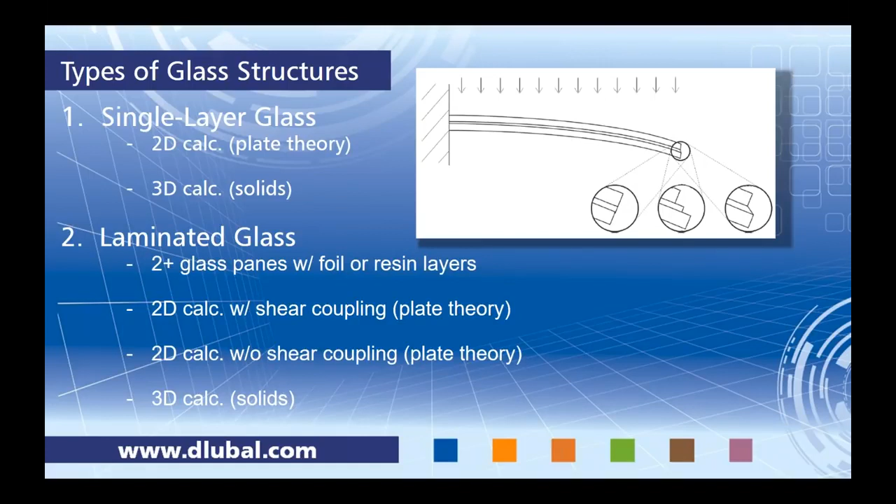The second type of glass is laminated. With laminated, we have two or more glass panes with a foil or resin layer in between. For this option, we also have 2D and 3D calculations available. The first 2D calculation considers shear coupling according to plate theory, which we consider a rigid shear coupling, indicated by this picture here, showing the cross-section of the layers and the rigid coupling at the ends. The 2D calculation without shear coupling is still according to plate theory, but there is no relationship in terms of the shear transfer between each of the individual layers, indicated by this second picture here. The third option is with solids, which is nice because we account for the shear stiffness between those intermediate layers to come up with the exact shear transfer between the shear couplings.

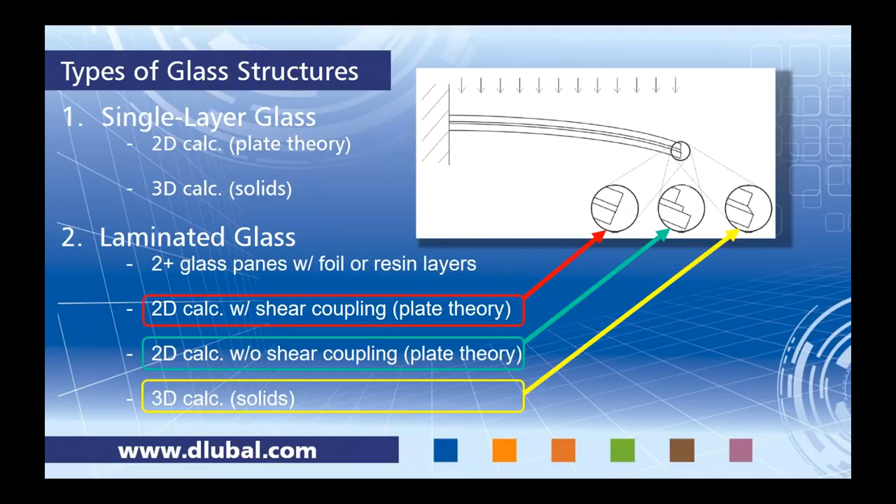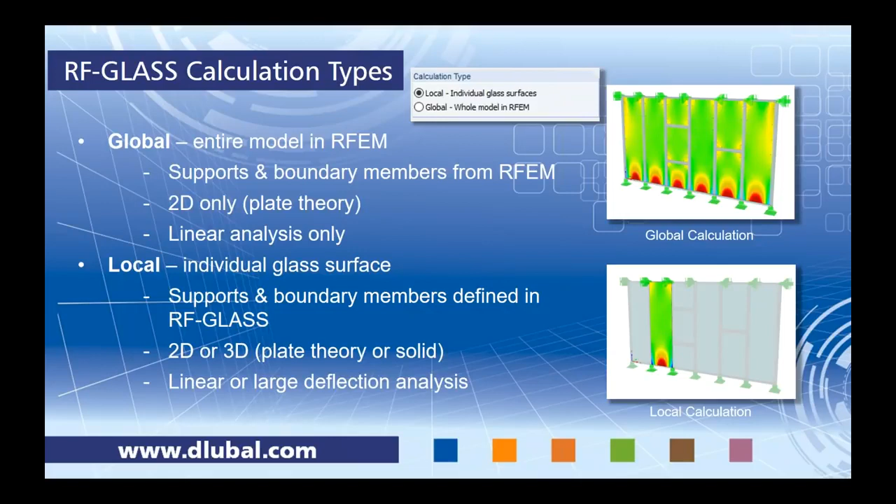I did want to touch upon the NCSEA putting together a new design guide. This design guide was just released this year, and it's called the Engineering Structural Glass Design Guide. To phrase it exactly how they phrase it within the design guide itself, it's to collate relevant design references, requirements, and analysis methods into a single source for easy reference.

I believe that when it comes to glass design within the US, it's a little bit difficult because unless you're an expert, there's really no clear-cut design path to take with glass. So what the NCSEA took upon themselves is to compile this document—it's not very long—to compile maybe some theoretical literature along with what we do know within the US, maybe according to the ASTM design guides, as well as Eurocode references, so that engineers without a lot of experience can relate to this design reference.

So I did want to touch on Chapter 6 with finite element analysis. This design guide goes on to state that, of course, we can always run hand calculations for glass design, but at some point these models may get a little too complex, so that's when we should turn to a finite element analysis software.

They also refer to global and local, but this is a little bit different terminology than what I just discussed with our global versus local. With the global model within this design guide, they state that the glass elements can be simplified into 1D member elements. This might be most beneficial just to gather internal forces, the load path, things like reactions, and to run a simple linear static analysis. By all means, this is possible within RFEM as well.

Okay, so we are finally ready to jump into our first example. It's quite common with glass design that we want to integrate it with our own custom extruded sections. These aren't sections that you would find within the AISC or the ADM, but rather some type of unique cross-section. Within RFEM, you most likely won't have access to quickly define this cross-section without having to manually calculate all the cross-section properties. So we've created a program called SHAPE-THIN.

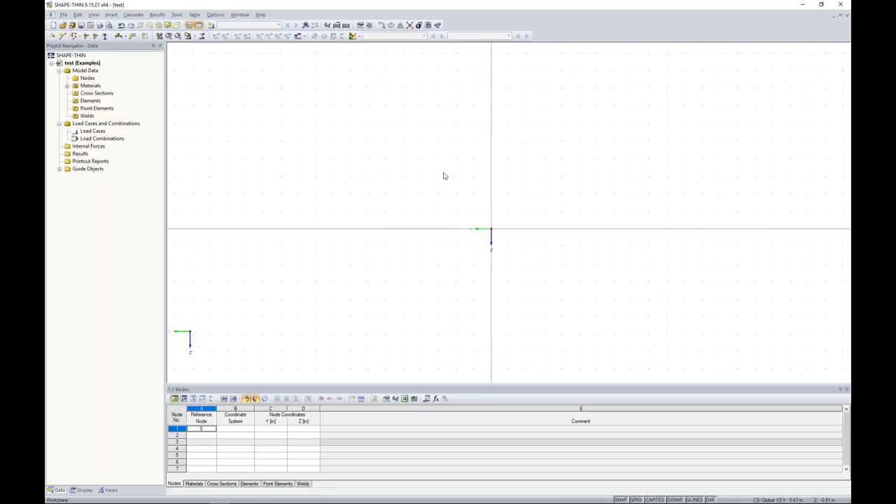For those of you who are familiar with RFEM, the interface looks almost identical, so that's nice that there's that familiarity. You can import an AutoCAD file, but today I'm just going to draw my cross-section and have the program calculate the cross-section properties that I can later bring into RFEM.

So what we'll start off with is a new polyline. With this polyline, I need to define the thickness of my cross section. We'll set this to something fairly thin at 0.15 inches.

As I draw this polyline, I can also take into consideration a bend radius. You can set that bend radius here. We'll choose 0.04. The material must also be specified.

Steel A992 is probably default when you first launch the program, and we can enter into our material database and use our filters over on the left. Instead of steel, maybe we drop down to aluminum and take a look at ASTM, further filtering to the ADM 2015. Now you can see the long list of all the aluminum material, so most likely you'll find what you need. Today we'll take a look at the T6510 for extrusions, and here are all of my material properties.

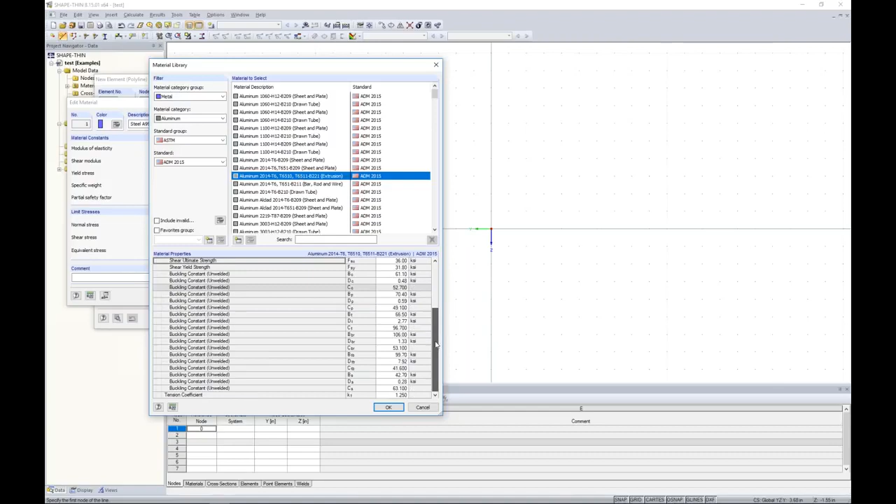I can click OK through these dialog boxes. Now I'm taking a look at my graphical interface here, and I can begin drawing my cross section. All I'm doing is snapping to a few various points on my drawing grid, and you'll notice that bend radius is taken into consideration when I turn these corners.

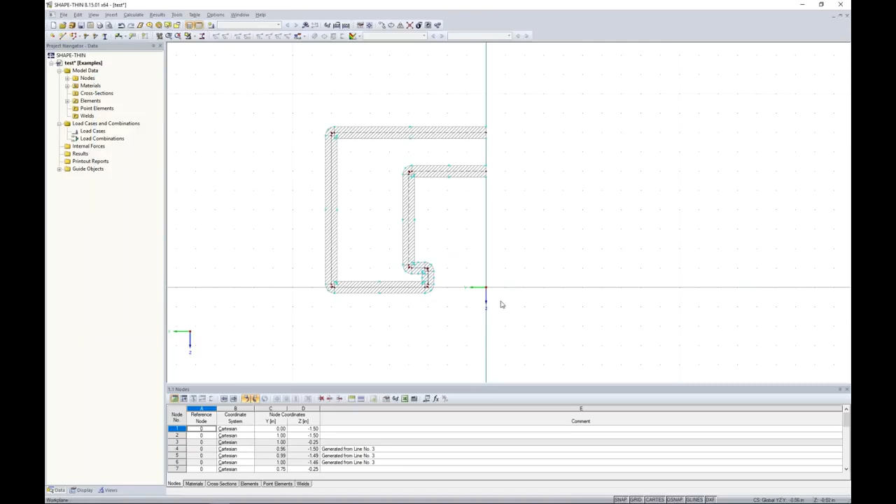Now I'm only going to draw half of the cross section because I can utilize some of these AutoCAD type features that make our lives a little more efficient. I can select the left side of my cross section and use my mirror tool, up here in the tools, where I can create a copy and mirror about the origin. I click OK, and just like that, a fairly simple but custom extruded section is created.

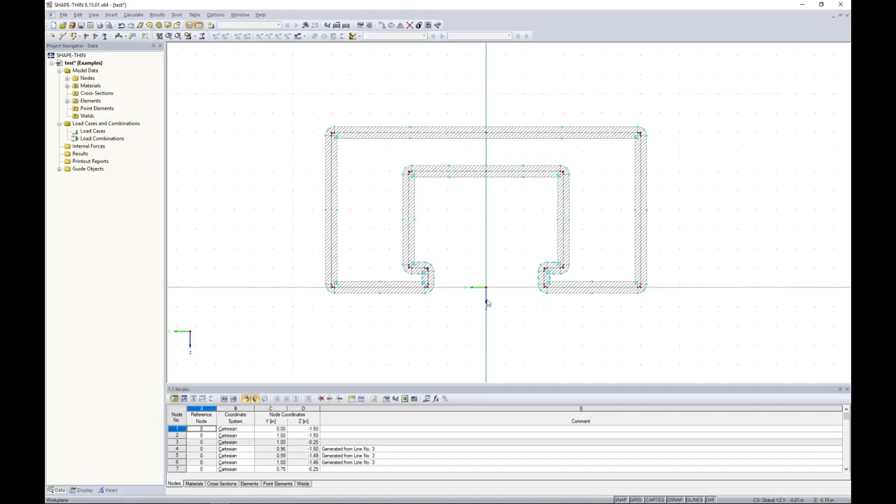So I'm almost ready to run the analysis to get my cross-section properties, but I want to jump to materials. For aluminum, you'll notice that the yield strength is automatically set to 0 here. So if I try and solve this, I'll get an error.

The reason why, if we take a look at the aluminum material, is that there are different yield and ultimate strengths depending on if we're looking at tension, compression, or shear. So the program simply doesn't know what to use when calculating the plastic cross-section properties.

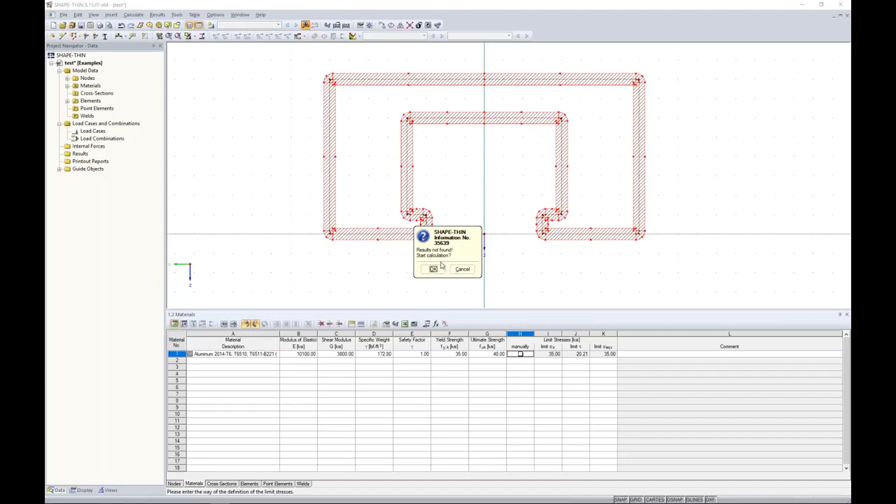So I can realistically set this to whatever, it doesn't matter, 35 and 40. The reason is because I'm going to redefine the material once I get into RFEM. So for now, just as a placeholder, we can now run the calculation with that applicable yield strength set in there, and in just a second you can see it solves pretty quick.

Now available in my results table are all of the cross-section properties for this custom cross-section. So we want to save the results, and you have to save the results with these calculated cross-sections in order to integrate it with RFEM.

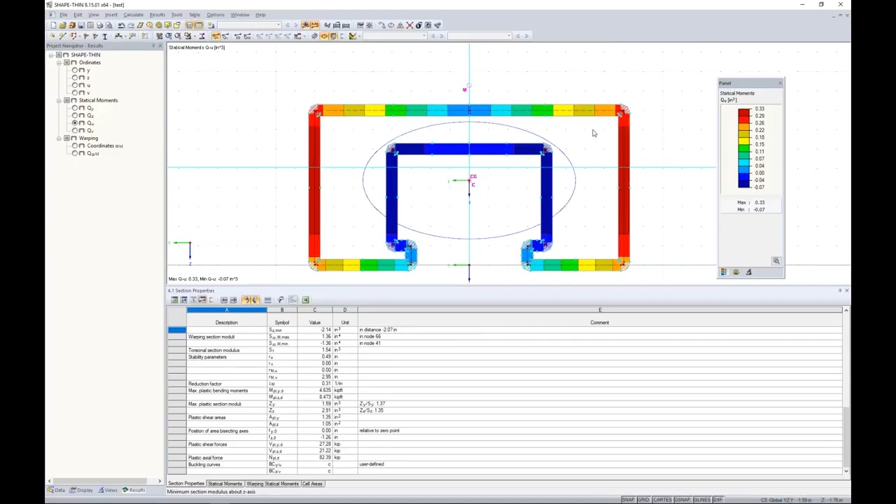So now, changing programs here, we'll go over to the program RFEM. To begin with, I need to create a model name. For this one, we can call it webinar. Now, the type of model is 3D.

So here's my graphical interface that we'll utilize to begin modeling our facade wall today. We also have our tables down here at the bottom to work with. You can import and export directly to and from Microsoft Excel, and we'll certainly be utilizing these quick tools up at the top.

Over on the left is our project navigator, maybe a little bit more unique to our program RFEM. As we begin to model here, all of our input data will be available in these tree-type lists.

The results will also be available here.

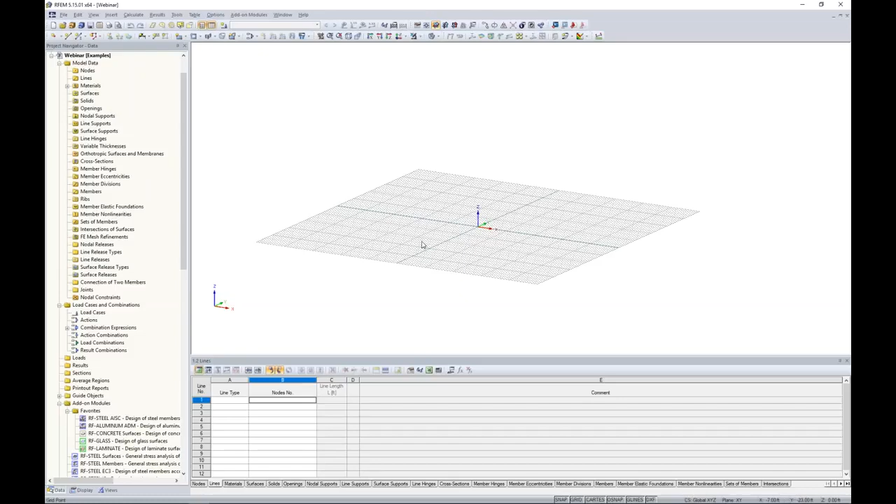So what I'm going to do is change around my drawing grid to begin drawing my facade wall. I want to start off with a new member, so I click on my new member tool. The member type is set to beam, and I'd like to take a look at my cross-section library.

Here are all of my cross sections available. This includes shapes from the AISC, the CSA, the ADM. You also have these parametric thin-walled sections here, but you'll notice that I don't see that custom section I just created. It's not an option to choose from.

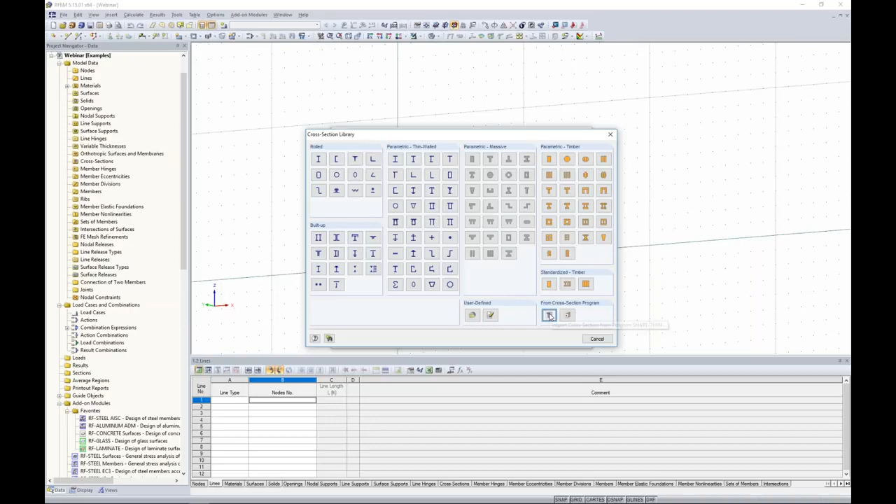So that's why we're choosing this option down here to import the cross section from Shape Thin. Then I simply navigate to where I saved that file, and there's my custom cross section available to me.

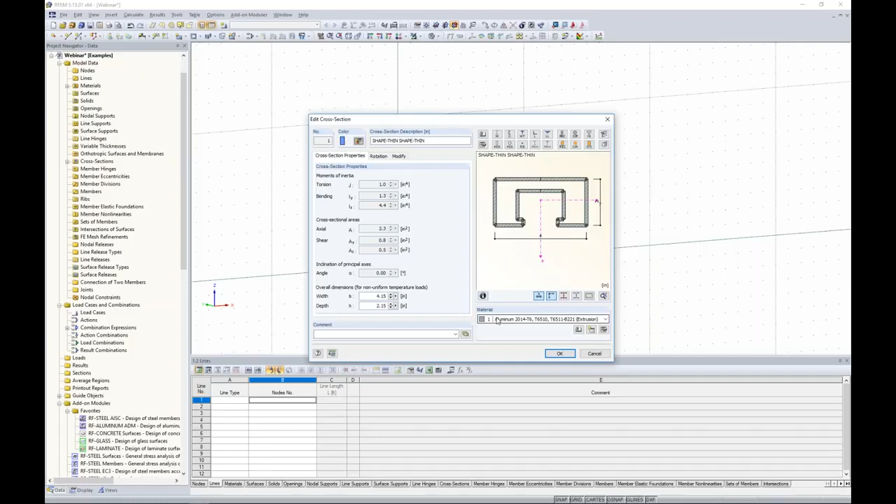Once I load this, I can also modify the material here. Perhaps this was set to steel A992 or whatever default material was in the program, but we can quickly access our material database here.

Again, this looks familiar - this looks exactly like what we saw in Shape Thin. We can filter on the left to the ADM 2015 to choose our T6510 for extrusions, and I click OK.

So just like that, we now have this custom cross section available to us within our main program, RFEM. All I'm doing here is snapping to a couple points to create my boundary members for my first glass panel. Once I'm done with that, I've created these 4 members.

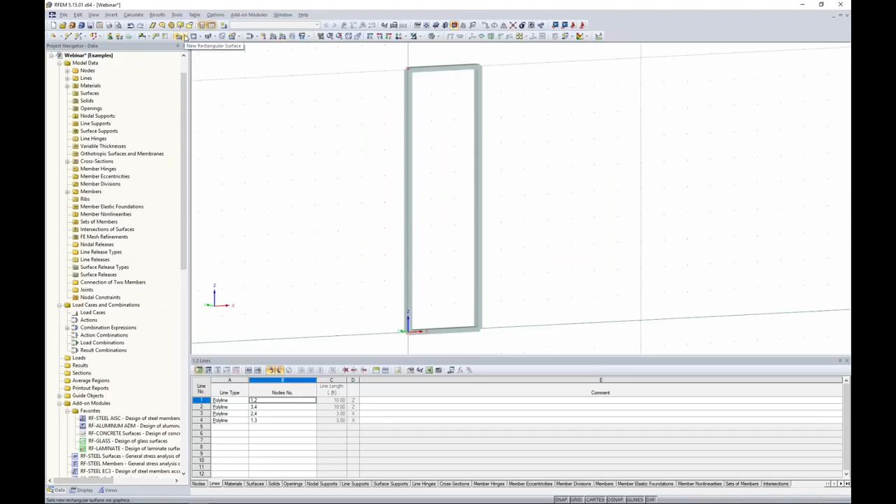I want to draw in my glass panel. We can do this with a new surface element. Up in my quick tools, just like how I drew the beam member, we can draw a surface element. You'll see here we have multiple surface shapes, but for today we're just going to utilize a typical rectangle shape. This is where we choose the stiffness from our drop-down menu, set to glass.

As far as the material and thickness, this doesn't matter - we're going to override this in just a little bit of time with the RF-GLASS add-on module. So aluminum, steel, concrete doesn't matter. Thickness doesn't matter - that's just another placeholder.

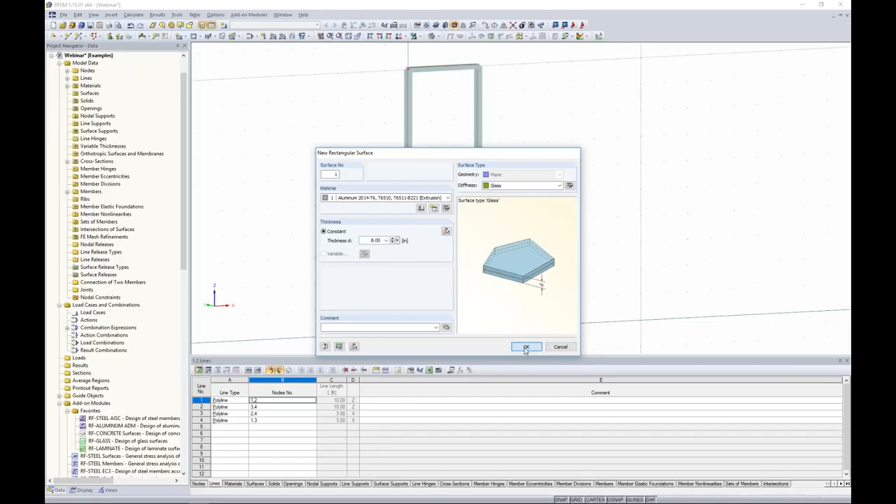So what we can do is just snap from one corner to the other, and then that 2D surface is drawn for us. Let's also say that we would like to release the moment of this glass panel framing into these boundary members - maybe it's not a typical connection type to transfer the moment from this surface element to those boundary members and vice versa. So how do we do this?

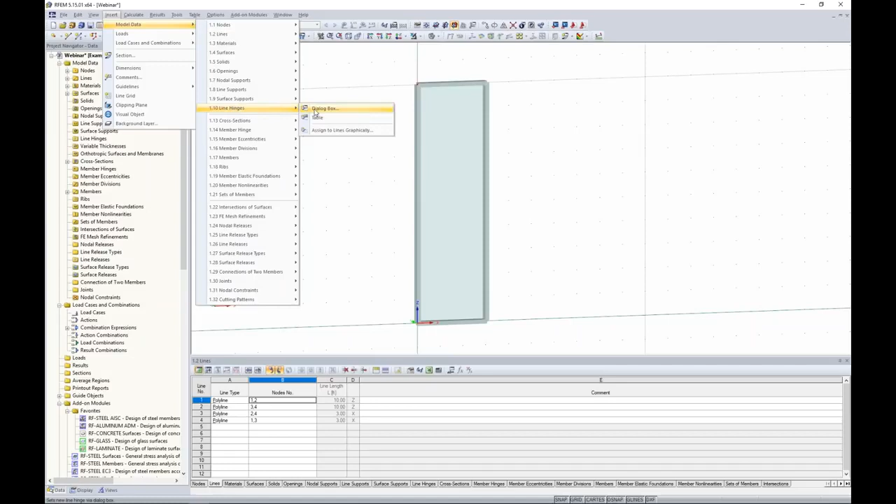Well, under Insert and Model Data, we have the option for what's called line hinges. I can assign to lines graphically, and up pops my dialog box. Right now I don't have a line hinge definition - it just says none. So what I'd like to do is create a new one. Here are my 6 degrees of freedom for my local axes according to my line.

Now, this is not the local axes of my surface, and it's not the local axes of that beam, but it's actually the shared line that they have in common. So what I want to do here is release the moment about the local x-axis of the line, which is along the line length, and I click OK.

So now I can select this surface and then easily click on the 4 line elements on the boundaries, click OK, and now we can see the line hinge shown here with this available symbol.

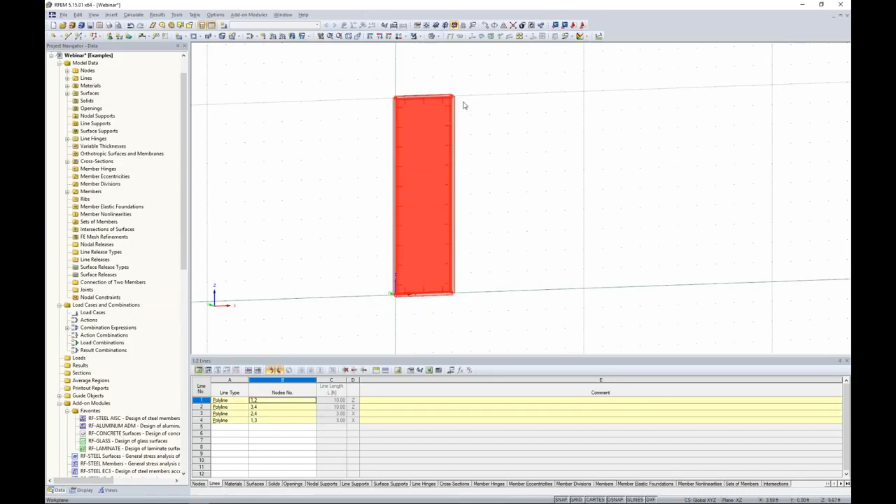I am going to select everything here, just like what I would do in AutoCAD for example, and use my Move Copy tool. I'm going to create 5 copies in the displacement vector of 3 feet in the global X direction. I click OK, and now it copied over the line hinges, the boundary members, and these surfaces.

Well, I've decided that for this 3rd panel and this 5th panel, if I hold down my Control key, highlight them, and I hit Delete on my keyboard, I want to subdivide these into smaller glass panels.

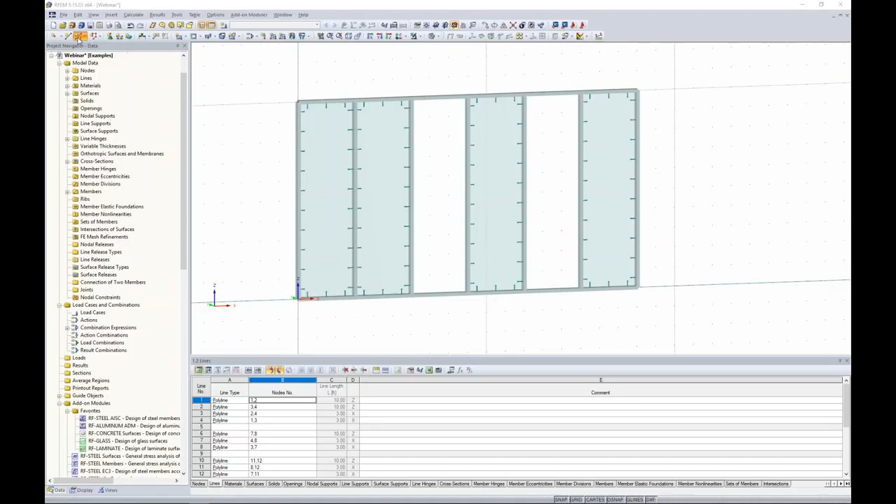For this, I want to draw a new member again. Now my Shape Thin section, along with my material, aluminum, has already been set - I don't need to redefine that. I'm utilizing the same shape and the same material. All I need to do is click OK, and then I can begin modeling here to create some smaller glass panels.

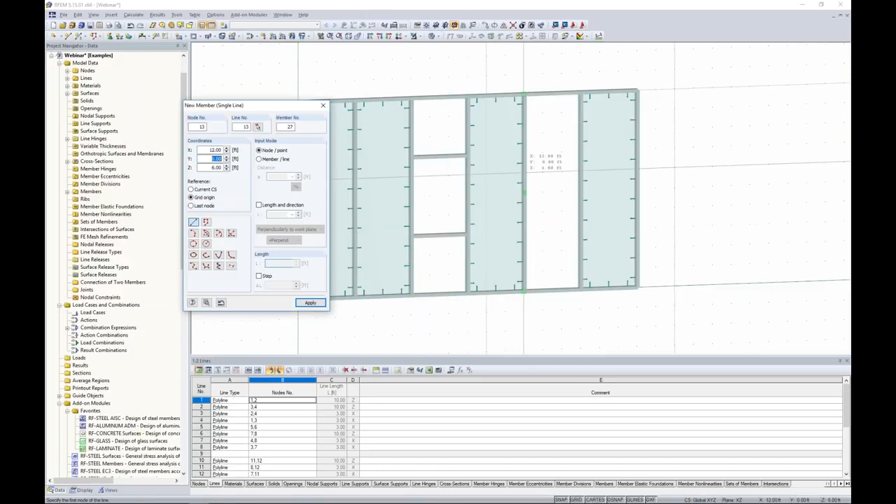We'll do the same over here, but we'll just subdivide this one in half, and right click. Now I'm going to utilize this tool up here to connect all of my lines, and that just creates a node here and separates these members.

Now you'll notice that I obviously lost my glass surfaces, so we want to go back to draw a new rectangular surface and set the stiffness to glass. Remember, the material and thickness don't matter at this point, we're just defining the geometry. So snapping from one corner to the other, I can quickly take into consideration these smaller glass elements.

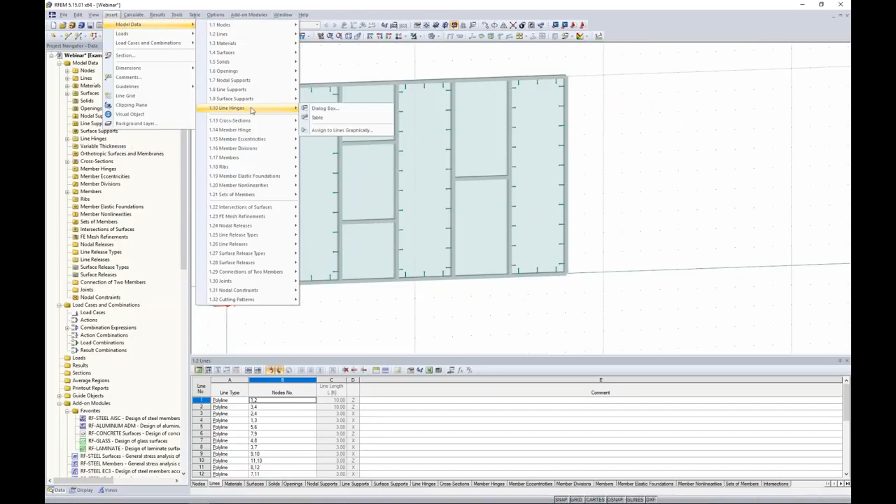Now I've also lost my line hinges, so under Insert, Model Data, Line Hinges, assigned to lines graphically. We've already defined the type, so I don't need to redefine that. All I want to do now is select this glass panel and select the 4 boundary members.

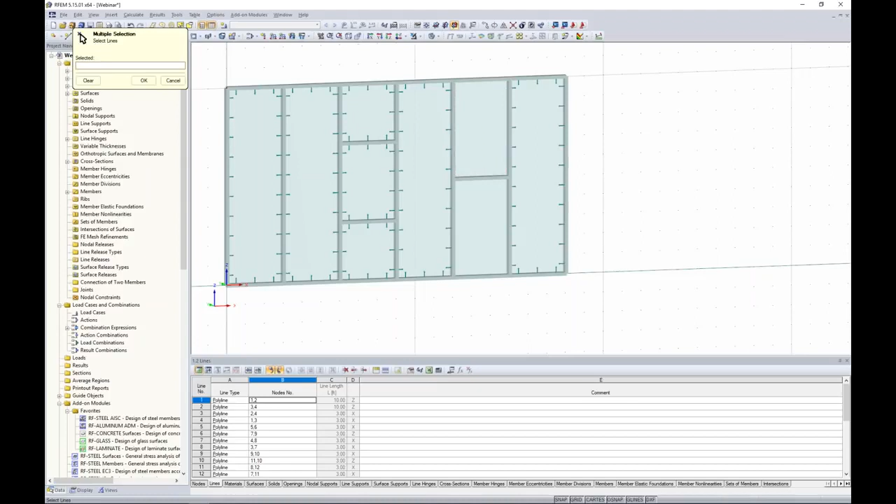And I need to do the same thing for all of these new glass surfaces. You can see the benefit here of utilizing that Move Copy tool so that we don't need to individually apply these line hinges to each surface like we're doing now for these smaller segments. We'll do the same for the 5th panel point location, and finally for our smaller panel here, we are done.

Okay, so the geometry is pretty much accounted for, but there's one thing I'd like to adjust. If we take a look at this member here and I choose visibility by selected objects and zoom in, you'll notice I get a great rendered shape of my cross section. Although it's custom and we might have some different lips and extrusions, you'll always get a nice rendered view so I know exactly where the orientation of my members are.

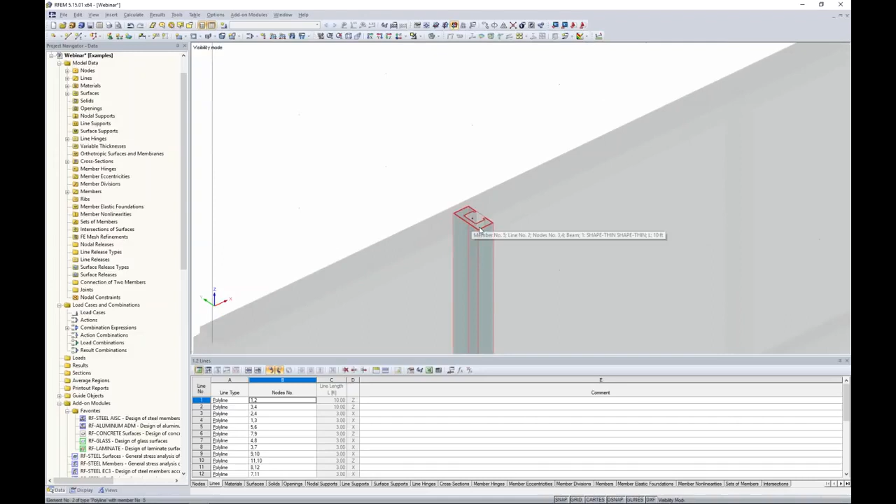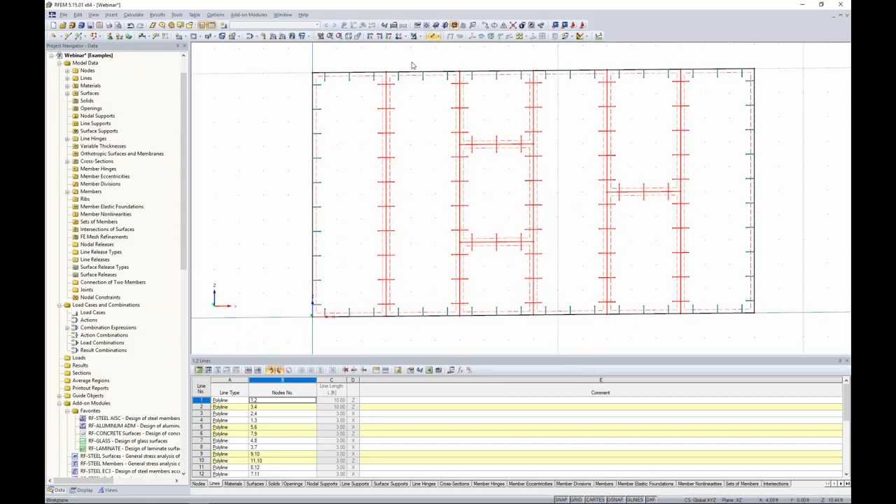For these internal members, I actually want to rotate them 90 degrees, maybe that's just the type of connection for this facade wall. So canceling out this visibility and turning this into wireframe view, I'm going to select all of my internal members here. I didn't select the outside boundary members, I just simply double click on one of the members, and then right away I can adjust the angle to 90 degrees and click OK. Now when I turn back on the rendered view, all of these internal members are now facing towards the global y-axis.

So we would like to support this wall. How we'll do so is with Nodal Supports, again just a simple tool up here, New Nodal Support. Now we have a couple default options, Hinge, which is a typical pin nodal support, and Rigid, which is fully fixed. For the bottom of the wall, let's just utilize a simple pinned application. I click OK, I highlight along the bottom of my wall here, and now that pin support will be applied to every node along the bottom.

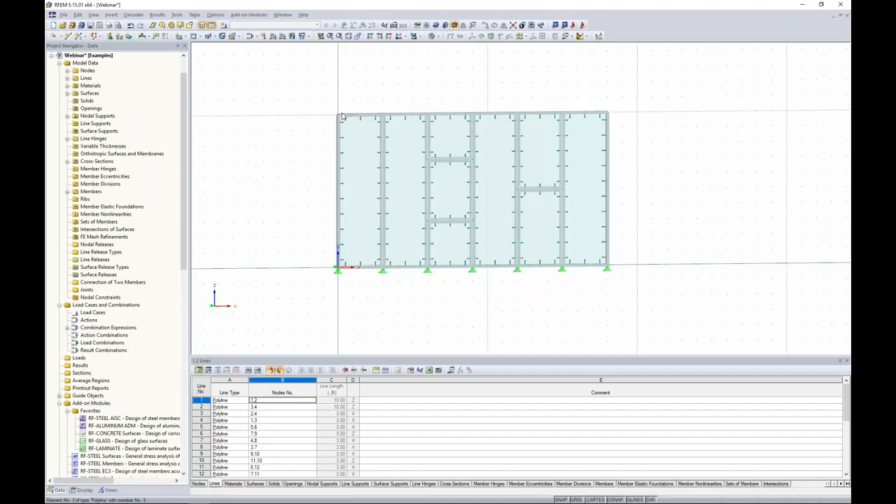As for the top, I also want to apply a nodal support, but this time I don't want to use one of these default options, I'm going to create my own. Here are my 6 degrees of freedom, 3 in translation, 3 in rotation. I'm going to release translation in the Z direction, so I want this wall to have a roller type support in the vertical direction. I click OK, so now I have this user-defined type of support, and I can highlight the top of my wall here.

So realistically, the modeling of the wall itself is complete. We want to move on to applying a couple loads to this wall.

For this, we need to first define our load cases. So another button up here called New Load Case, and up pops my Edit Load Cases and Combinations. The first load case is going to be dead load. Now the action category is important because this tells the program what load factors to apply according to ASCE 7. This one will be according to the dead load, and self-weight is automatically activated here.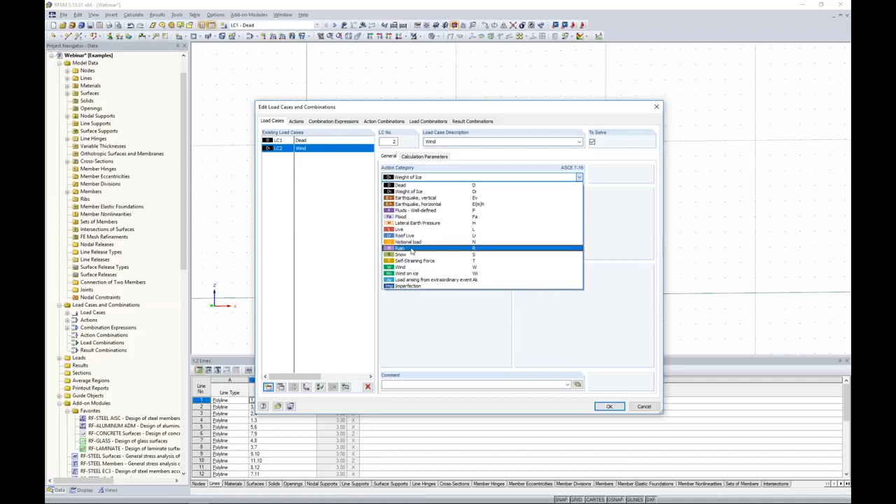For my second load case, we will call this one wind. The action category will be set to wind. Self-weight is not activated here because we don't want to account for it twice.

The combination expressions tab is the program telling me it's going to generate all the LRFD load combinations and all of the ASD load combinations. To see these individually listed out, let's go to the load combinations tab, and here are my 3 LRFD load combinations and my 3 ASD load combinations.

This is a fairly short list because we only have 2 different load cases defined. So once I'm done setting up my load cases and load combinations, I need to actually apply a load to this wall. By the way, we can see these load cases and load combinations generated for us here.

Let's make sure we're in the LC1 dead load. For dead load, I'm going to make the assumption that I only want to apply self-weight here. Well, remember that's already accounted for within the load case itself, so I don't need to do anything further.

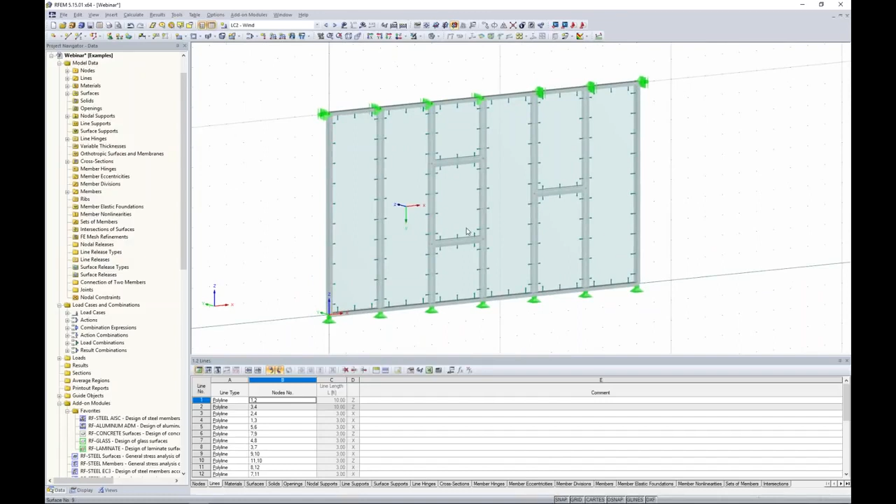As for wind load, I scroll to wind load, and I do want some type of surface wind load acting on the face of this wall. So I'm going to go to a new surface load. Here I'm going to apply a force, and the load direction is going to be in the global Y direction. You can see here my global axes, and I want this load acting on the face of this wall. The load distribution is going to vary in the vertical direction.

What do I mean by that? Well, at the top of the wall, I would like the magnitude to be something around 25 PSF, but at the bottom let's decrease that slightly to around 20 PSF. The thing that I do need to define is to tell the program what's the top of the wall, what's the bottom of the wall, and how do I want to vary this.

That's easy enough to do by just choosing any arbitrary point first at the top of the wall and a second point at the bottom of the wall. Now the program knows what magnitudes to associate at which points. I click OK, and then I just simply highlight my entire wall. And just like that, we have our wind load applied to the surface here, which is varying in the Z direction. So pretty simple for our loads being applied today.

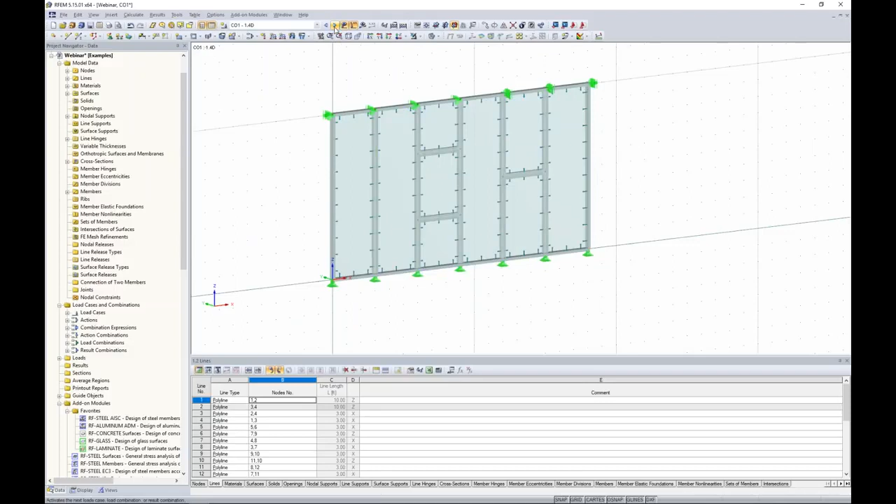We can see the load combinations here with the load factors applied for dead load and wind load and so on. So one final thing to do before we jump to the RF-GLASS add-on module, and that's to take a look at our finite element mesh.

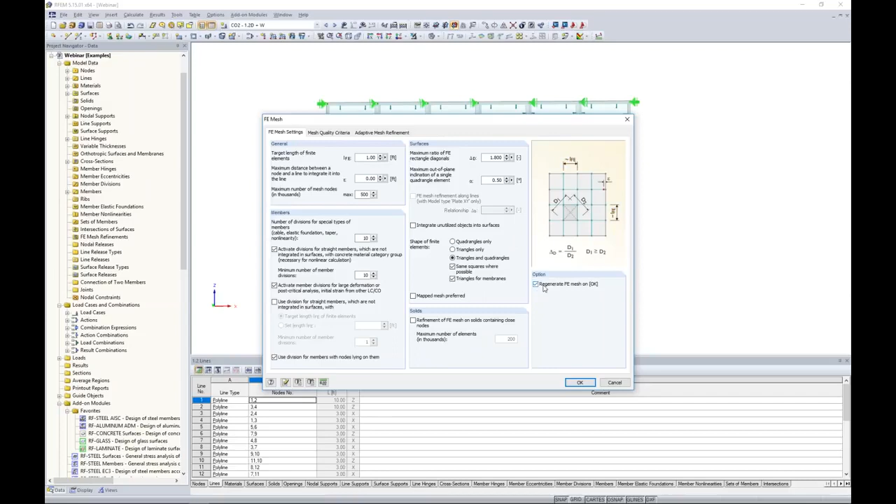Well, these are surface elements, so we want to take a look at the FE mesh settings to make sure we're going to get accurate results. Under Calculate FE mesh settings, the global FE mesh length is always set to 1 foot for a new file or new model within RFEM. Let's leave it as the default, and here I'm going to regenerate the FE mesh once I click OK.

I can see here that my FE mesh is a little bit too large. I only have 3 FE mesh points along the width of these glass panels. This really just isn't ideal to give us accurate results, so it's always suggested that we go smaller than this. Now this will increase our solution time slightly, but in turn, of course, we need to see accurate results.

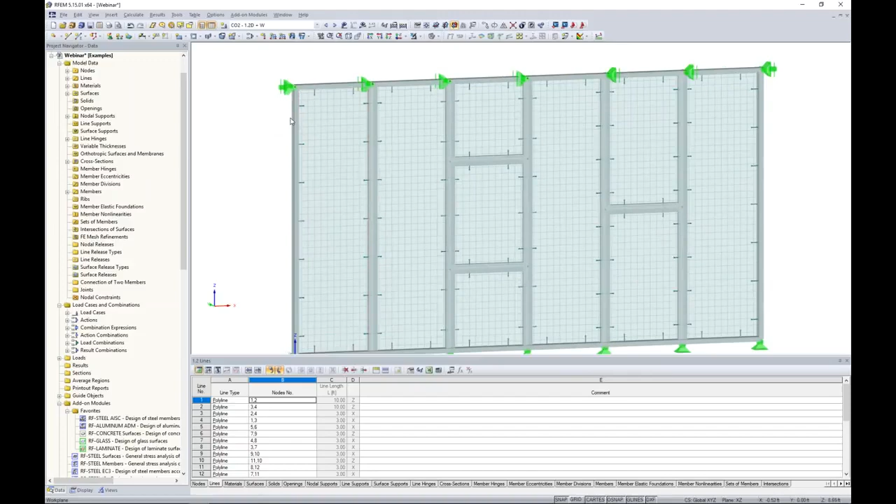So under Calculate FE mesh settings, let's try something like 0.25 feet, and we can regenerate this again. Well, this looks much better, and I know that's a little difficult to see, but maybe we turn this into wireframe view. We can see the FE mesh settings along the width is much smaller, so that looks much better.

Okay, so the geometry, the loading, the FE mesh, everything's done, but remember we still have these glass surfaces here. So this is where I want to launch the add-on module RF-GLASS. Everything you've seen up until now was in our main program, RFEM. So in our project navigator, here is our long list of add-on modules. As you can see, RF-GLASS is one of them. So we can launch this add-on module and up pops nothing more than a dialog box.

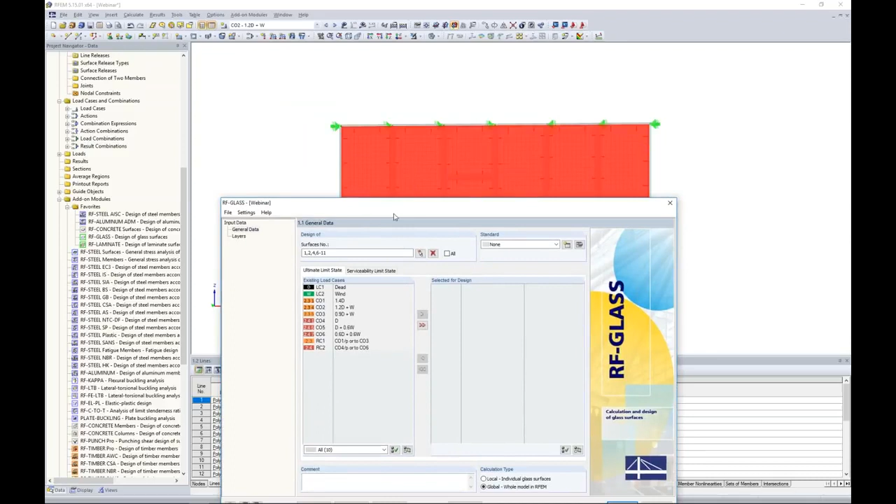Now, as I mentioned within the PowerPoint, we need to first choose the calculation type. For this, our first example, we're going to utilize the global calculation. The standard is set to none because we're just doing a stress analysis and design. These surfaces that we're designing for, you can see they're all highlighted here because they're all being selected for design, but by all means, you don't need to choose every surface if you're not interested in it.

For the ultimate limit state design, we'll choose our 3 LRFD load combinations, and for serviceability, we're choosing our 3 ASD load combinations. As I mentioned, we can also check deflections.

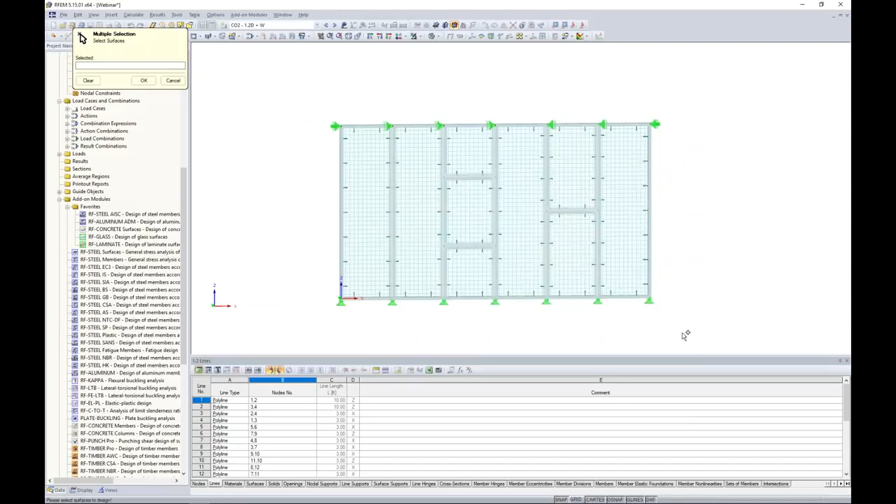Then it's as simple as working down this list from top to bottom. So we move on to the layers, where we define our different glass layers. The first thing to do is select the surfaces that this first composition will apply to. I can highlight them all, and you can also create more than one composition.

So maybe for these smaller panels, I wanted to use a thinner glass. You could certainly do so all within the same model by assigning different surfaces to different compositions. So we're going to utilize laminated glass.

The first layer type is going to be glass, and here is where we would access our material library. Typically when you launch this for the first time, you're really only going to see a very small amount of materials that really aren't relevant for the ASTM or the US market.

So this is why we give you the opportunity to define your own. For me, I've created a thermally toughened float glass, and I've placed it in what I call an ASTM glass standard. Depending on the manufacturer, or if you're going off of the ASTM standards, you would just add that material here with this option to create a new material, put in your material properties, and that will always be available for all file types when you're modeling in RFEM.

So the first glass layer will have a thickness of 0.12 inches. The additional information here is just based on the material, so we probably won't be making any adjustments to that since that's defined directly by the material itself.

The second layer is foil. When we go to the material library for glass and foil, we can see here that we have some options that are not related to any standard, like PVB would be a common inner layer, for example. We do have a manufacturer here for SentryGlas according to the ASTM. And by all means, you can always add your own inner layers as well, whether that's a foil, a resin, PVB, and so on.

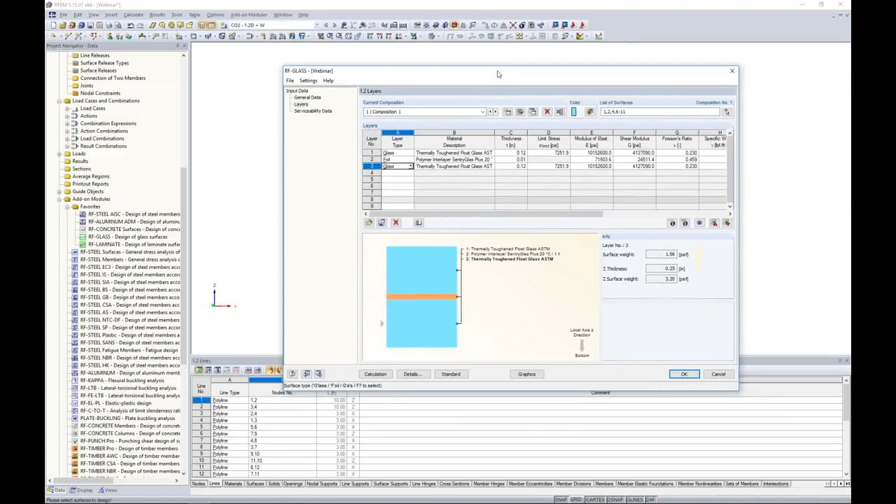That's fine. So you'll notice here a graphical representation of my layers, and here is a note showing you what the local z-axis direction is according to these surfaces. It's very important that you pay attention to the orientation of your local axes of your surfaces to make sure you've defined your layers correctly. Now, in this case, it's completely symmetrical, so it's not so important. But in our next example, we'll see where it does become a little bit more important.

You can save these compositions, by the way, and pull them up for any future models into a library. So what's happening behind the scenes?

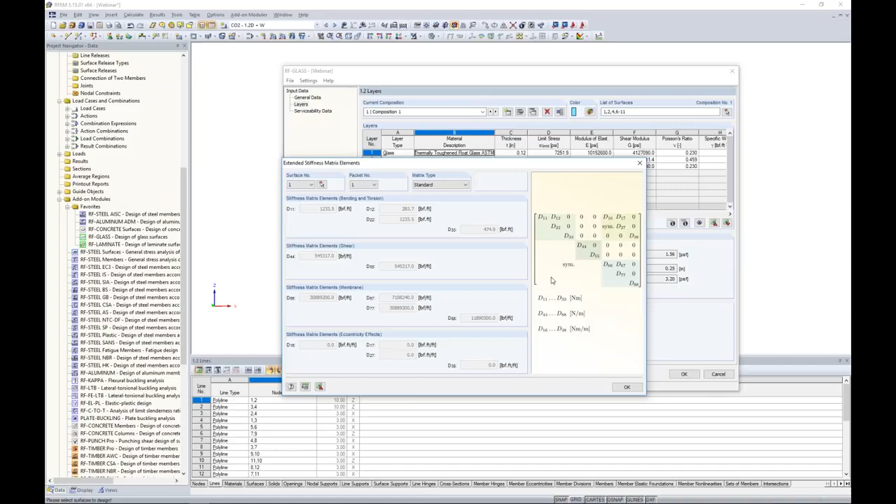Well, for each individual layer, I can take a look at the stiffness matrix for that single layer. What the program is doing in this module is taking into consideration all of these layers that I've just defined, and it's creating a global stiffness matrix. We can actually view that here within this add-on module. This global stiffness matrix is then exported back out to RFEM, and we're going to rerun the analysis here with the correct material stiffness matrix to ultimately get our results back into this module. So that's kind of what's going on behind the scenes.

Now, one last thing to look at here is edit composition details. The only details that we really have here, not too much. We can either consider coupling, and remember, according to 2D plate theory back from the PowerPoint, when we consider coupling, it's a fully rigid shear coupling. When I uncheck this, then we don't have any shear coupling between any of the layers at all. So for today, we'll keep this as a rigid shear coupling.

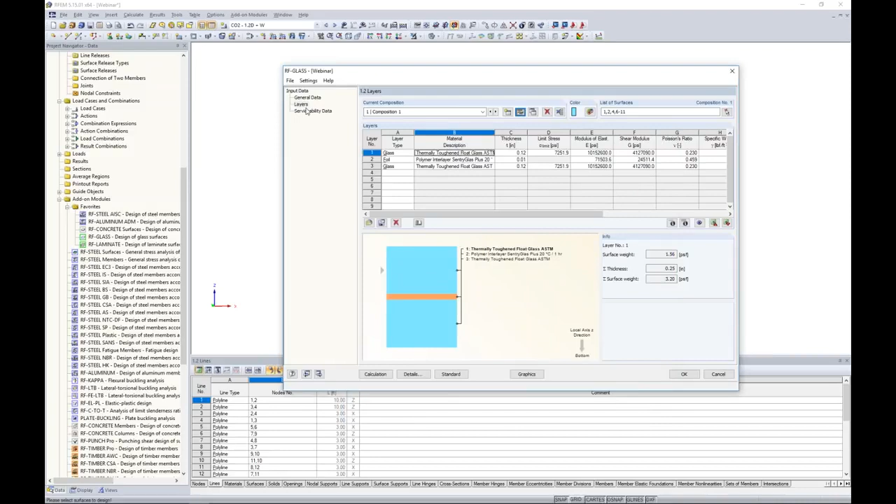And finally, we jump down to serviceability data. We can also design the serviceability checks here. So we can select all surfaces that we're interested in for the deflection.

The reference length is the length that's going to be used in our limiting deflection ratios. The program has a few defaults here: the minimum boundary line, the maximum boundary line, or you can type in your own length definition. So for today, maybe I use the maximum boundary line of 10 feet, which is the total height of the wall.

Is the deformation related to the undeformed system? Is it a displaced parallel surface? So basically, is this absolute or relative that we're supposed to be measuring these deflections from? Well today we'll keep this according to the undeformed system, and that's what these pictures show down here to clarify exactly where the deflections will be measured from. You can also set if this is a cantilever surface as well.

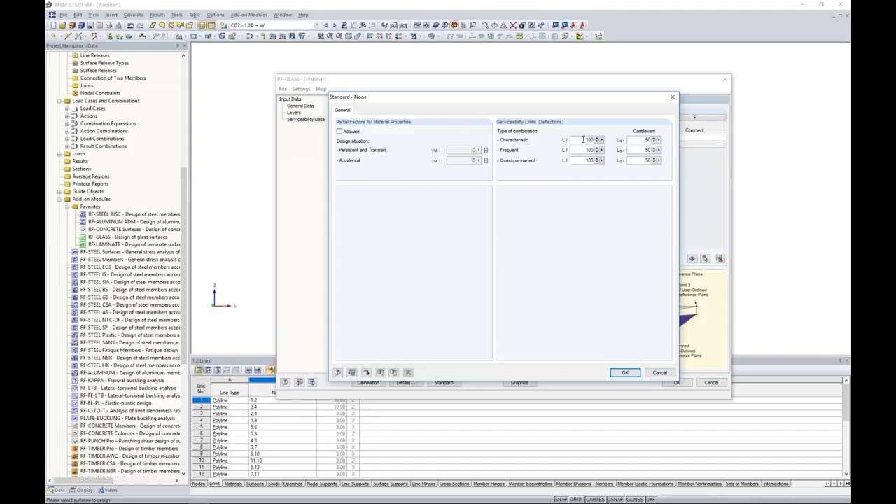So the question is, we've defined all this information, but what's my limiting deflection ratio? That's controlled under the standard button. We can see here for this first line, because we only have characteristic load combinations for ASD back on the general data tab, the deflection limit by default is set to L over 100 for simply supported, L over 50 for cantilevers. Glass is obviously a little bit more sensitive to deflection than what we'd see with a steel beam, which might be more like L over 300. So by all means, you as the user can control what these limiting deflection limits are.

And just like that, we're finally ready to run our calculation. Now this takes a split second, and that's because it's a linear static analysis. We're just exporting out that global stiffness matrix, and then we're bringing back in the results into RF-GLASS.

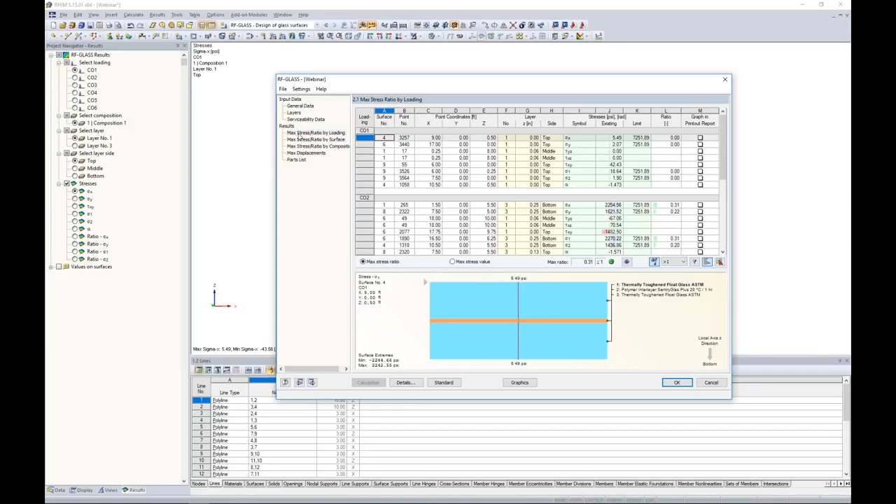So once it's done with the calculation, our results are presented to us in this table format. We can view the max stress ratio by loading. We can view the max stress ratio by surface, so we should have all of our surfaces shown here. We can view the max stress ratio by composition.

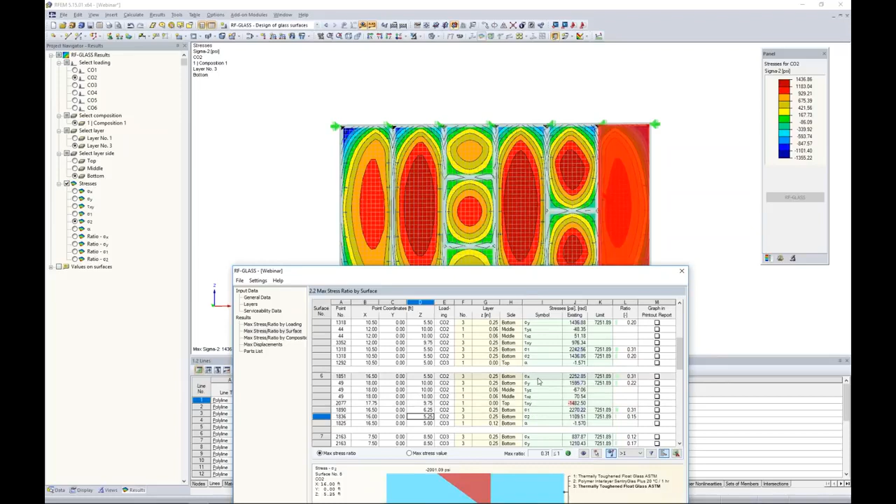So when we're looking at this table, the max stress ratio by surface, you'll notice that as I'm scrolling here through my table to different values, the program is highlighting in the background exactly which surface I'm looking at. From there, we can take a look at our normal stresses in the local XY axis, our shear stresses, our normal principal stresses as well. And ultimately we're seeing the required stresses based on the analysis, as well as our limiting stresses, which is just based off of our materials, and finally a ratio check for our stress design.

The program gives you the summary here. So out of all these surfaces, the max ratio is 0.31, so relatively low. And we have our nice green smiley face here because he's less than 1.0. If you're seeing a red sad face there, then you know that you probably are a little overstressed and you're over 1.0.

The max displacements, this is our serviceability check. So we can see the displacements based on the analysis, and we see our limiting displacements based on that L over 100 ratio. And then we have a serviceability ratio given to us, with the controlling one being 0.61 along with our green smiley face. So remember, for any of these tables, you can export directly to Microsoft Excel for further sorting, which obviously is going to have much more capabilities when it comes to that.

The parts list is also given here, which is a material takeoff. So we will also give you that information.

Now the tables are nice, but it's also beneficial to jump to our graphics view. So with our graphics view, we are technically still within this add-on module. You can see it here from our drop-down RF-GLASS, but we're viewing all of our results graphically back within RFEM. And now our results tables are presented to us here under the Project Navigator, where we see our loading combinations.

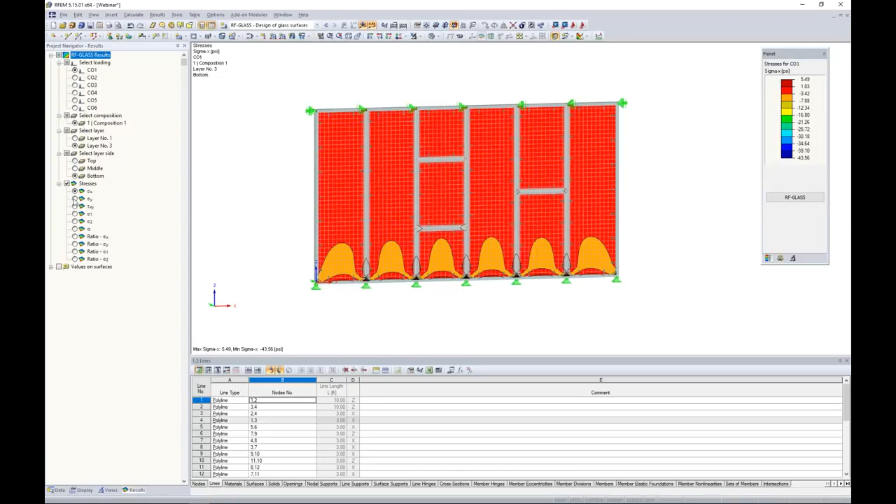From here, we can view the two different glass layers. Remember, we have one on the inside and one on the outside. And even furthermore, you can view the top, the middle, or the bottom stresses for each layer. From here, the stresses are given to you that you can scroll through, whether that's shear stresses or ratios for however the stress checks come out. And that's all available to add to your printout reports.

Maybe you want to make section cuts through this, so everything is possible here graphically. So that really sums up a global calculation type within RF-GLASS.

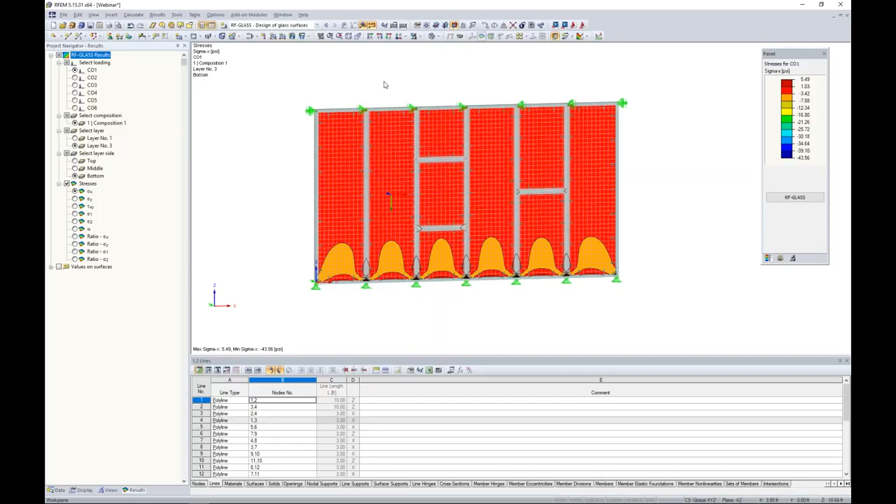Let's say that we ultimately decide we want this to be insulated glass instead. Remember, for insulated glass, we have to run a local calculation, and a local calculation can only really consider one glass element at a time. So we're going to take one of these panels. Under a different file, I've simplified it, just taking one of those glass panels, keeping the supports, the boundary members, and even the same wind loads. For the second example today, utilizing insulated glass, we want to launch RF-GLASS again.

When we launch this add-on module, the calculation type here will now be set to local. The standard is still set to none. The surfaces that I want to design, well, we only have one surface here, so let's move forward with this one. As far as the load combinations, I'm actually going to come back to this. Right now, I'm just going to put a simple placeholder in for my LRFD design.

The reason why is we're going to make some adjustments here with climatic loads later on, so in just a minute we'll get back to this. In the meantime, we simply move up or down our list over here, and you'll notice a few more tables are available now.

So the first thing for our layers, and this should look familiar, we want to select our surface here, surface number 3. The layer type is going to be glass, and I still have my thermally toughened float glass from the ASTM with a thickness of 0.22.

The next layer is going to be gas, and this is where we can utilize our material library here. We have a few gases implemented, and again you can always add your own gas. For today, we're going to utilize argon with the gas properties given here.

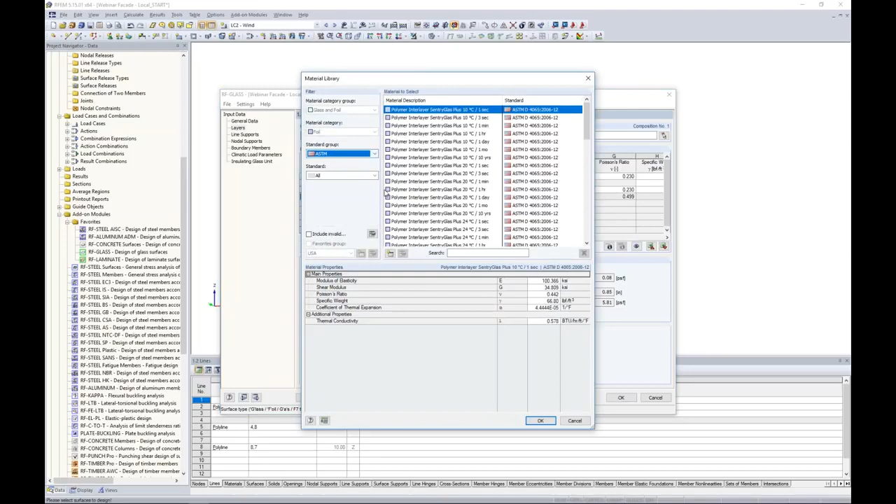The third layer is going to be glass as well at 0.22 inches. The fourth layer is going to be my foil, and again I'm going to go back to my material library and choose that SentryGlas for 20 degrees Celsius. I click OK. The thickness is 0.01 inches, and my final fifth layer is going to be glass again at 0.22 inches. So there are my 5 layers.

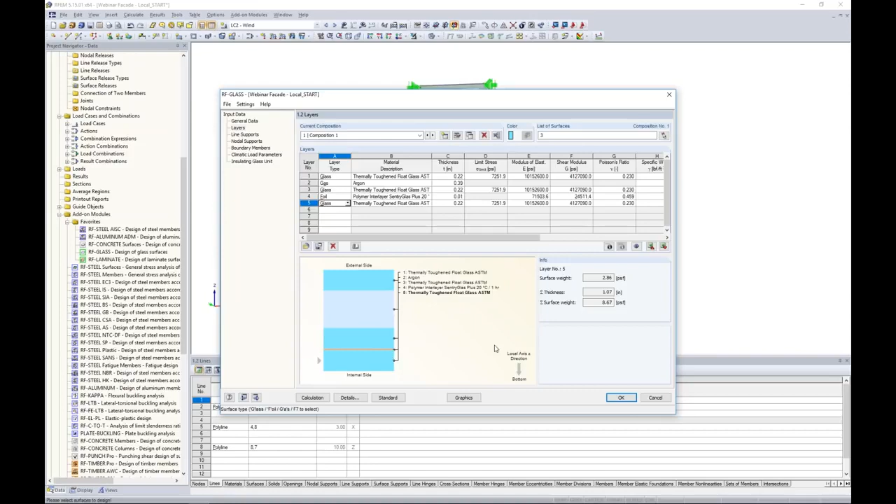Now you can see the profile here of our different layers, and this is why it's incredibly important to pay careful attention to your local z-axis. Even more so with insulated glass, the program has to determine what's the external side and what's the internal side. So if these don't match up to what you'd like to see, in our case, we want the gas closest to the external side, then you need to make some adjustments here with your layers to make sure that those match up.

Let's take a look at the composition details. This is quite a bit more information than what we saw with our last example. Remember, we only had shear coupling to consider here. Well, now you can see the method of analysis is automatically set to a large deformation analysis, and this is because we have introduced a gas layer into these glass surfaces. And we run this according to a Newton-Raphson.

The modeling of the laminated glass - this is interesting here. This will also be a 3D calculation utilizing solid elements. So by the way, in the background, once we run an analysis, that 3D model is going to be created with solid elements instead of surface elements. So what we can do here to consider coupling, we also have to utilize 3D elements for the laminated portion of our glass. But if I uncheck the coupling, then it will automatically use plate theory for the laminated portion of my glass here. Today, we're going to consider coupling and just utilize solid elements throughout the entire surface of this glass panel.

Save created temporary models. I just mentioned that in the background, the program is going to regenerate this entire RFEM model, and instead of 2D surface elements, it's going to create 3D solid elements. That's all going to go on behind the scenes, but you do have the ability to save that created temporary model and to actually pull it up like you would any other RFEM model. I'll actually check this here and I'll show you what one of those looks like.

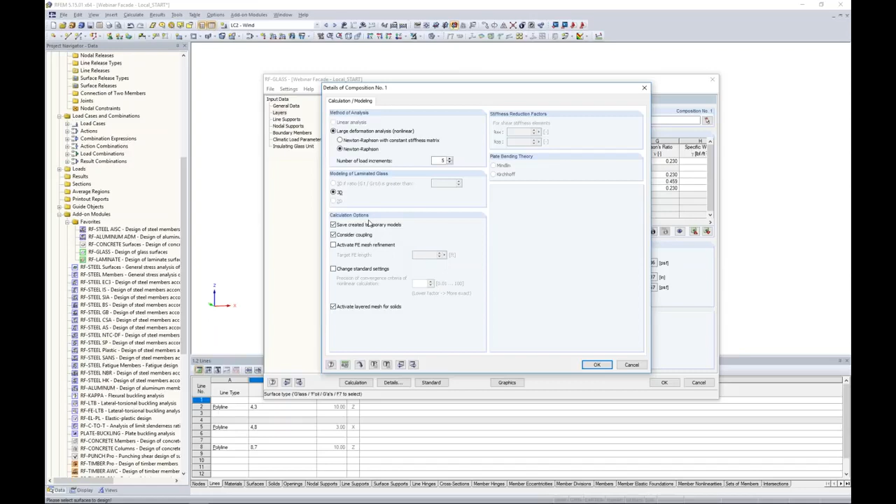Then we just have some further FE mesh refinements here, and we can click OK. So line supports and nodal supports.

You remember from the PowerPoint, I said that you have to redefine your support types with a local calculation. Now the program does this, so technically these support types shown in RFEM now will be completely ignored. That's why we need to redefine it here. But the program is smart enough to make an attempt at defining what you already have drawn in the RFEM model. As you can see here, my 2 support types are shown, and the program has some support type defaults here.

Now, these support type defaults, if you want to find out more information, you can click on any of them and see our 6 degrees of freedom here and how exactly the program is supporting each glass layer. Remember, we have 3 glass layers for this insulated panel, so the program will support as such. If you want more information, our help file under this little question mark in the corner explains a bit more clearly what's going on.

Now, in our case today, I don't really like what the program is suggesting. So instead, I'm going to individually define my support types. The first one will be node number 4, which is my lower node here. And instead of hinge type 3, I'm going to choose user defined.

So now when I scroll in here, we can see our different glass layers along with our gas right here, but I can only support the glass. So for my middle layer of glass, I'm going to set this to none. I'm only going to support layer number 1 and layer number 5 at the center line, and I'm going to apply a basic pin support at these locations.

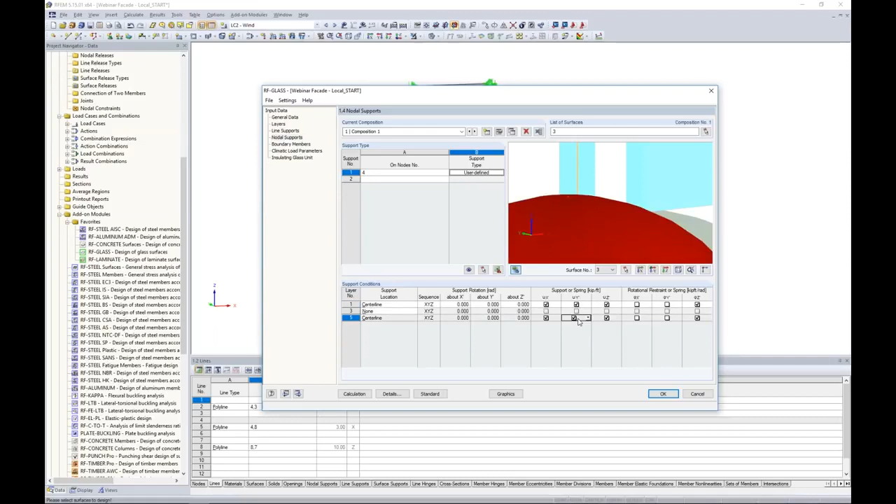Now, let's go ahead and graphically select a couple different nodes here. We're going to select the upper 2 nodes, and this will also be user defined. I'm going to not support the center layer, and as far as layer number 1 and layer number 5, I'm going to release the X and the Z here.

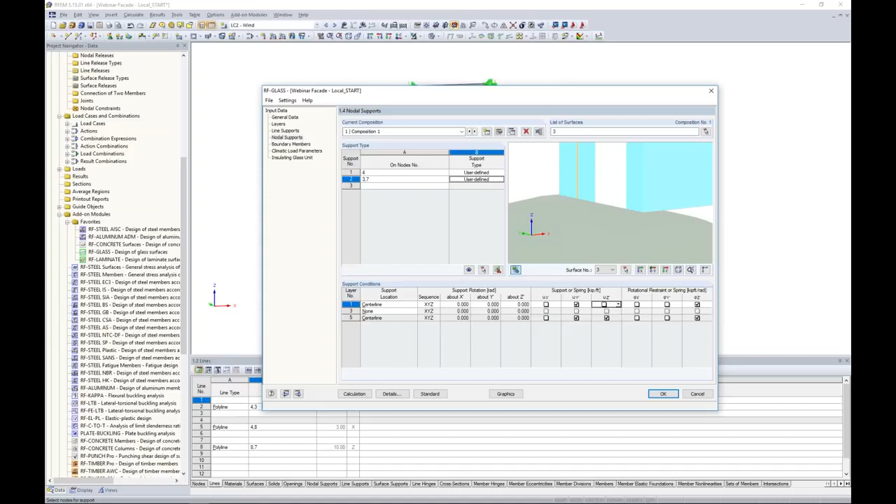So now we have some type of roller support, and I can zoom up here to see these nodal supports being applied up here to the top. So they're a little large, but essentially you get the picture. It's being applied to those different glass layers.

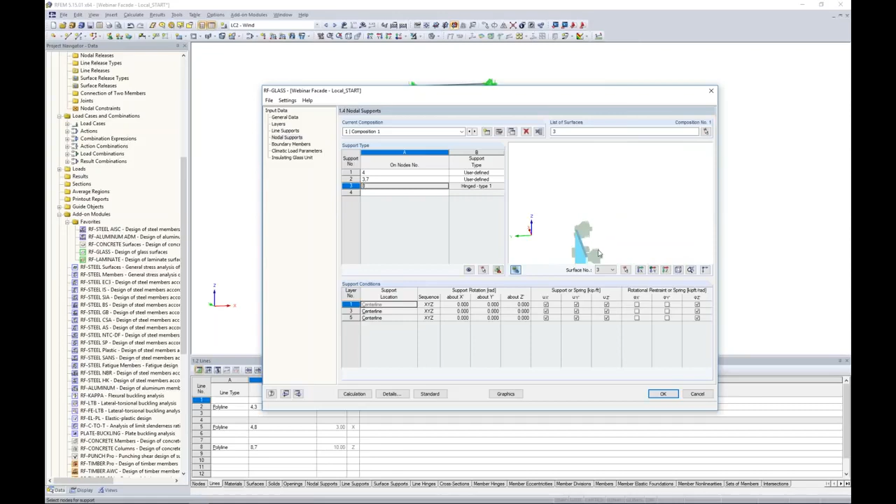And finally, we have one more node to define, and that's in the lower right corner. I click OK. Again, we can zoom out here to view that in the smaller picture, and we can zoom in.

Now for this same concept, we're going to go to user defined. We're not going to support the center layer. The 2 outer layers remain a pin support, but I want to have sliding in the X direction. So now I have manually defined these support conditions.

So you can see a huge difference here of utilizing those 3D solid elements and how much more detailed you can get with your support types.

Now, the boundary members, same concept as our support conditions. If I zoom in here, well, here is my custom cross-section from SHAPE-THIN. But I need to tell the program where exactly to apply these boundary members. How do they frame into these glass panels?

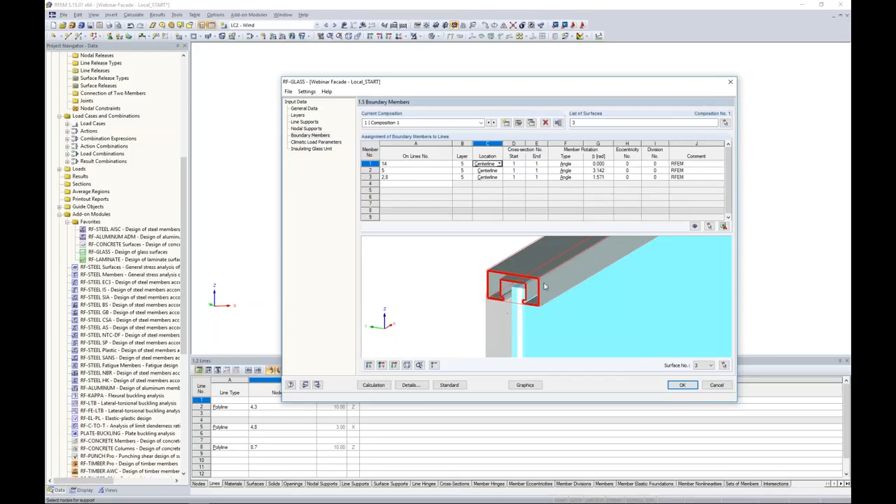Well, again, the program makes some suggestions here. It notices, hey, I see boundary members in RFEM, let me go ahead and attempt to put them into this glass module as well. This is where you can see we have glass layers 1, 3, and 5 that we can apply it to, and even more so, you can apply it to the upper edge, the center line, or the lower edge. For this case, we will just keep the program suggestions for the boundary members.

Climatic load parameters. This is where we want to take into consideration differences in temperature loads, atmospheric pressure differences, altitude differences. The reason why is because maybe this glass is being manufactured at a different location than where it's actually being installed. With this, the program will automatically calculate and figure out what all these gas pressures should be based on this criteria.

So you can see here that we have climatic load for summer and climatic load for winter. The other thing to notice is that we want to keep this checkbox unchecked, the automatic gas temperature calculation. You can take a look at this.

This is pretty advanced, so unless you're a glass design expert, you probably won't be doing much with these options. So we'll leave this unchecked for now.

I also have a document if anyone would like to see it on how these gas pressures are essentially calculated within the program. Feel free to email us after the webinar and I can send that back to you. So not to get too complicated here, the first thing we need to do is put in some information.

Number one, where is this glass panel going to be manufactured and what is that atmospheric pressure? Let's assume it's somewhere at sea level where the atmospheric pressure is around 14.7 psi. The altitude is 0 feet and the average temperature during the summer is fairly cool at 65 degrees.

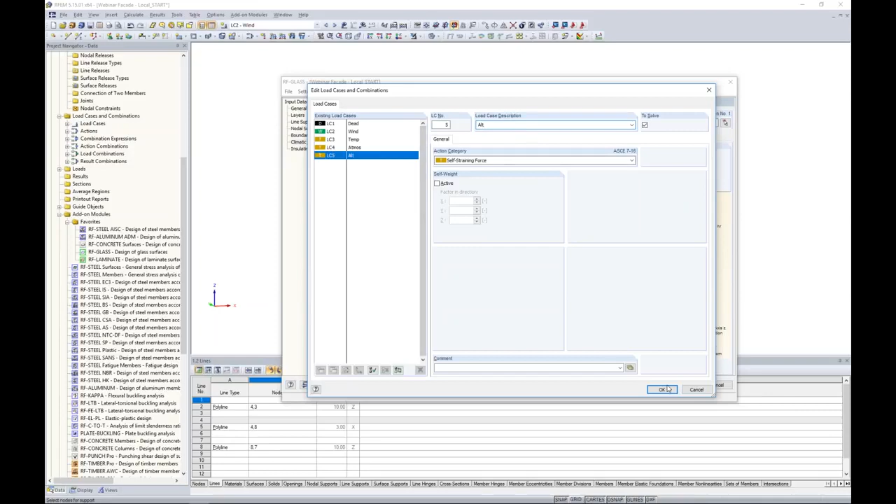So climatic load for winter now, I think we understand the idea. For the sake of time I'm not going to fill out all of these, but we'd want to give it the same information for winter conditions.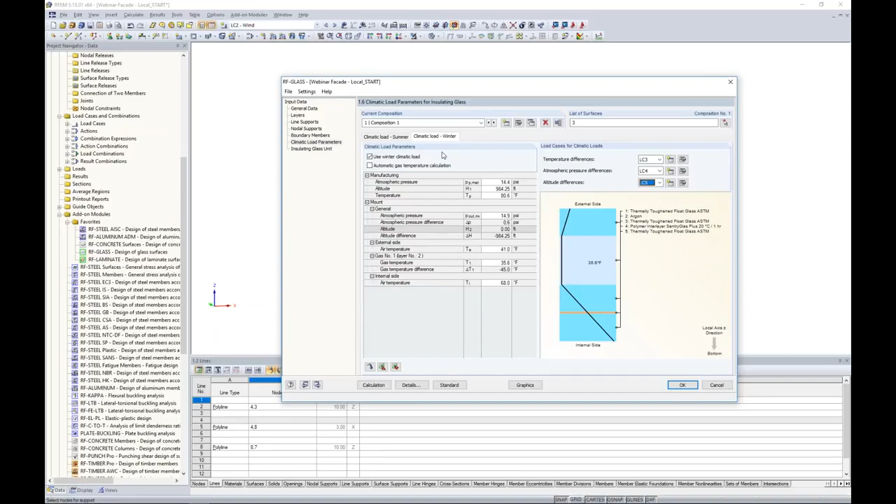Now for the climatic load cases, we can still utilize these same load cases I created for summer. That's because the program is smart enough to recognize that the gas pressure happening during the summer isn't going to occur with the winter. Those won't occur at the same time, so it's going to create two separate load combinations, one for summer and one for winter. That's why we can utilize these same load cases.

Remember, I said way back on the very first tab that we needed to get back to this. Well, now I see those additional load cases here, but I don't see my load combinations generated. That's because RFEM is the program that controls the generation of load combinations, not RF-GLASS.

So what we want to do is quickly go back to RFEM, and all I need to do is utilize this drop-down. The program automatically updates, and now here are all of my load combinations with those new temperature, altitude, and atmospheric pressure loads. You can see a much, much longer list now.

Now when I go back into RF-GLASS, those are all available here for design. So you can move all of the LRFD load combinations here and serviceability. If you'd like to consider all of them for deflection checks, you can move all of them over here as well. So that's how the climatic load cases come into play and why we need to update those after the fact.

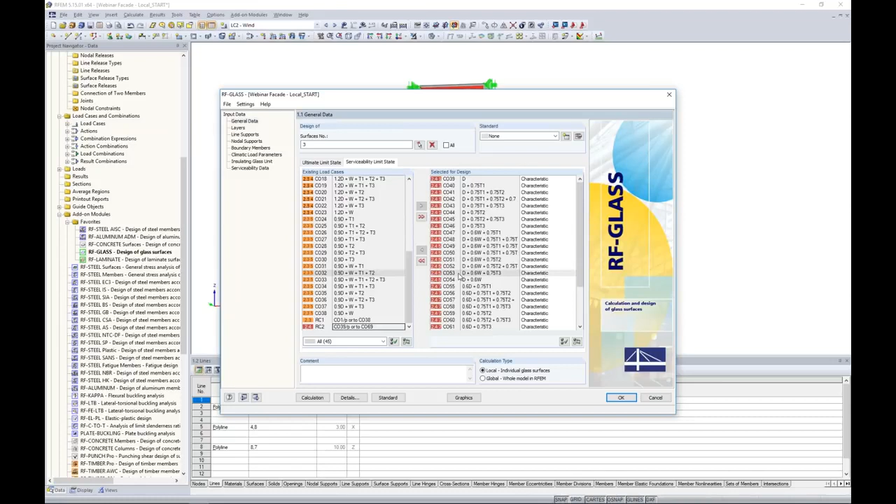Insulating glass unit, this is in regards to our secondary seal. Remember, we have an insulated glass, so we need to somehow seal in this gas layer. For this, I'm going to jump back to the PowerPoint to quickly explain what's going on.

With the secondary seal, if I were to uncheck this option, remember this entire section is grayed out. So what's going on behind the scenes? We're going to apply what's called helper supports. Helper supports prevent pressure on the side surfaces. So what do I mean by that? Well, let's refer to this figure down here.

We have our gas layer, and our gas layer on either side has glass layers. Now, glass is relatively stiff, somewhere around 10,000 KSI. And the program will automatically model a soft material at the edges, something more around 1.5 KSI.

When we apply these gas pressures, remember from temperature, altitude, or atmosphere, without those helper supports we're going to get side deflection like this. Obviously this is not desired. We want to see the deflection within the glass itself, not with the soft material on the outside. That's why we apply helper supports, which are fairly high in stiffness, so that we'll see deflection more like this with our glass panels.

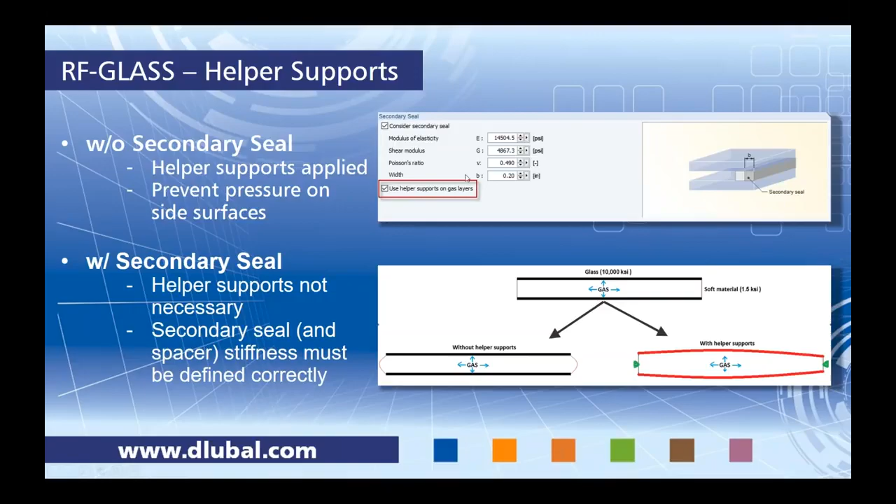Now, when we choose the option with secondary seal, we turn this on and give you the opportunity to define the stiffness of the secondary seal as well as a spacer, so you can accurately consider what that stiffness should be. That's why we now give you the option to turn on or off those helper supports. If you'd like to define the stiffness exactly, turn off the helper support and you'll get the exact behavior there. For us, we're going to turn this off today, and we're just going to use those helper supports.

Now, number of finite element layers in the gas layers, this is by default set to 2, according to the depth of that gas layer. You can increase that; the more you increase it, the longer your solution time. But if you have a fairly thick gas layer, you may need more than 2.

The force load distribution: here are my 5 load cases: dead, wind, temperature, atmosphere, altitude. The program needs you to define at what percentage is applied to the external part of the glass and what is applied to the internal. For dead load, it really doesn't matter because we only have self-weight defined, but if we had some other dead load applied, such as a line load on top, you'd want to apply 50% to the external, 50% to the internal.

As far as the wind load, we want 100% acting on the external, since it's an outside load acting on the face of the surface, so let's keep 100% there. As for temperature loads, this is kind of up to you as the engineer; maybe 50% on the external, 50% on the internal. Same goes for the atmospheric pressure, and finally the altitude as well. We just put 50 and 50 for all of those.

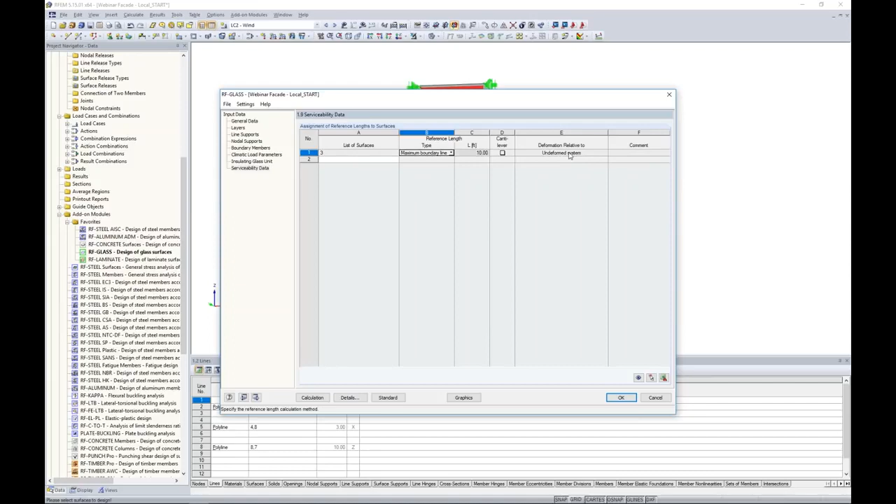So now we're finally ready to run our calculation. As you can imagine, we now have a lot of load combinations to solve for, not to mention the program behind the scenes is creating these 3D models and generating the gas pressure, so it takes a little while to solve. Instead, I'm going to jump to an already solved model here.

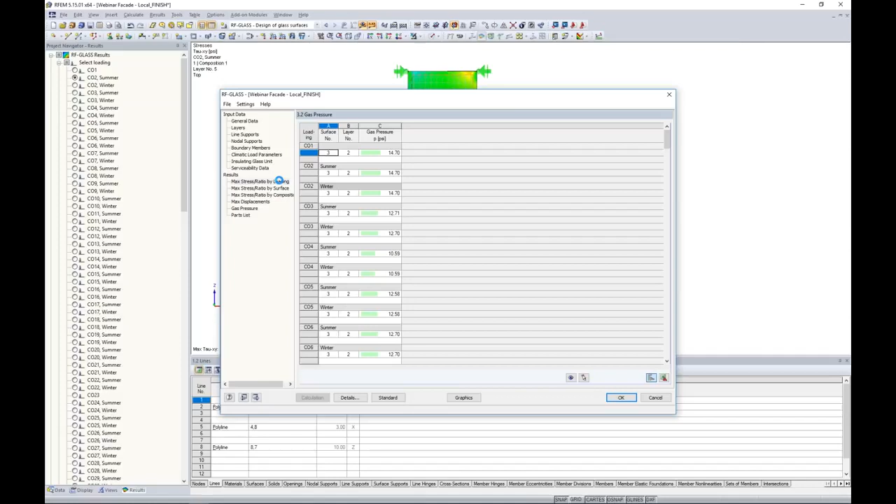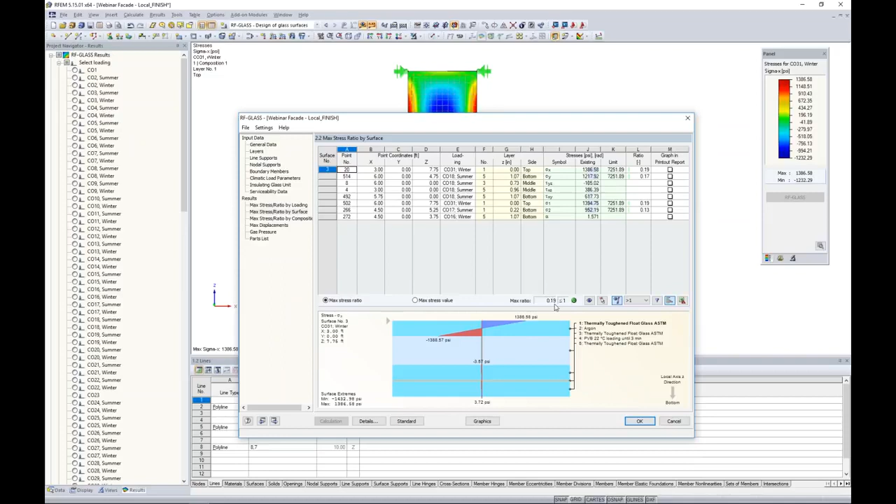Essentially, this is what would be presented to us within the glass module. This looks pretty familiar: we'd see max stress ratio by loading, by surface, by composition. As we can see here, we only have one surface, and we can take a look at our normal stresses, our shear stresses, and ultimately we're going to get a controlling ratio here for our stress design. For this one, relatively low, 0.19.

Again, we can check displacements. The controlling ratio here for a serviceability check is 0.43.

And a new table would be gas pressure. As I mentioned, the program is smart enough to determine that there needs to be 2 separate load combinations, one for summer and one for winter. So here's load combination 2 for summer, and load combination 2 for winter. Same thing for load combination 3: you see summer and winter. These are the different gas pressures you're going to see based on summer versus winter.

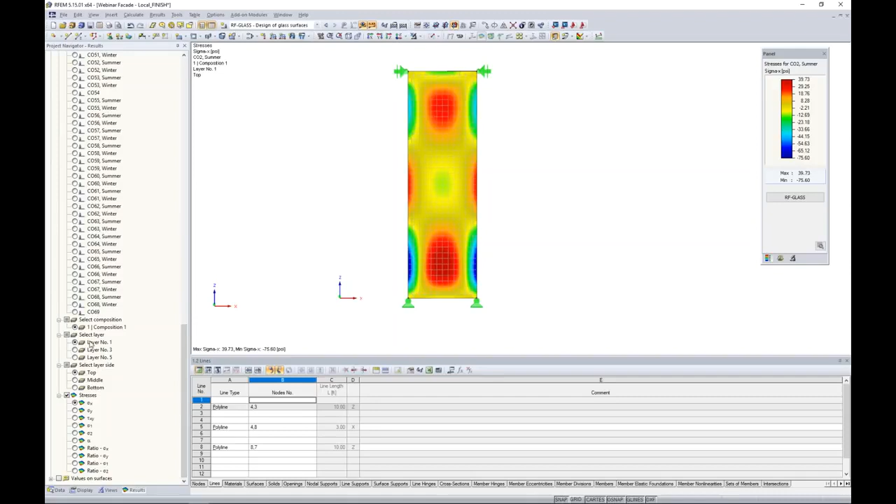Now, it's always beneficial to jump to the graphics, and here is my very long list of load combinations. This was an exhaustive list; maybe for your design purposes, you don't need to consider all these different scenarios, but it is possible if you'd like to. From here, we're just choosing a single load combination to view graphically, and just like what we saw with our global example previously, we choose one of the glass layers. This time we have 3 glass layers, layer number 1, 3, and 5. Then we can view the stresses for all of these different layers and all of these different load combinations.

So really, that's what I wanted to show you with the results of this local model. But there was one other thing I mentioned. I told you that we were going to save these generated models that the program's creating behind the scenes for our solid elements. So this is the model I have saved in my folder, and the program will automatically generate 3 additional models.

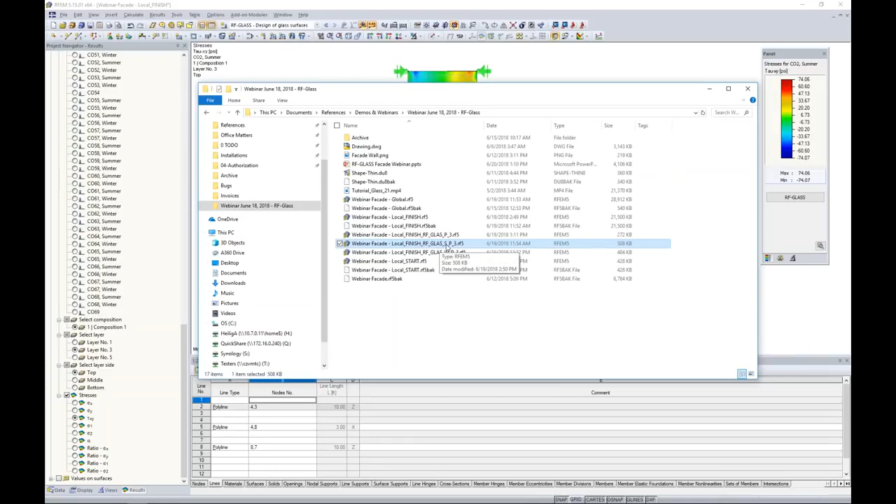You can see it here: RF-Glass summer, RF-Glass winter, and then one with RF-Glass without those climatic loadings according to temperature. If I open up one of those, this is what you're going to be seeing. The program automatically generated your exact same model behind the scenes, and you can pull it open here just like you would with any other RFEM model.

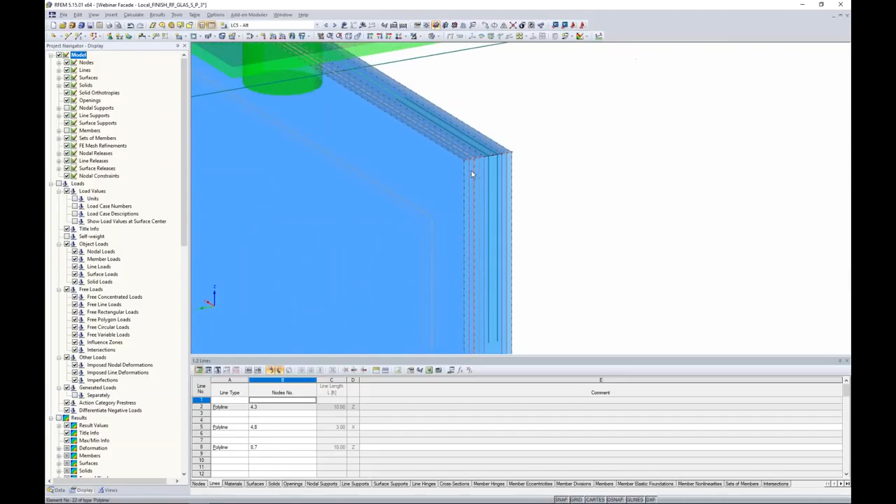So maybe jumping to the display type here, let me turn off the display of my members. Maybe I turn off the display of my nodal supports, and let's zoom in here. Now you can see instead of a 2D surface, the program is automatically creating these solid elements to represent each layer. Here's my gas layer, here's my glass layer in the front, here's my laminated glass in the rear.

The other thing you'll notice too, these are my helper supports. Those are the rigid connections that the program's placing at the edges to make sure we get the desired deflection. Again, the boundary members are shown here. Here's my custom shape thin section shown, as well as the nodal supports. Those nodal supports are defined on the individual layers that I applied them to. So this is what's going on behind the scenes.

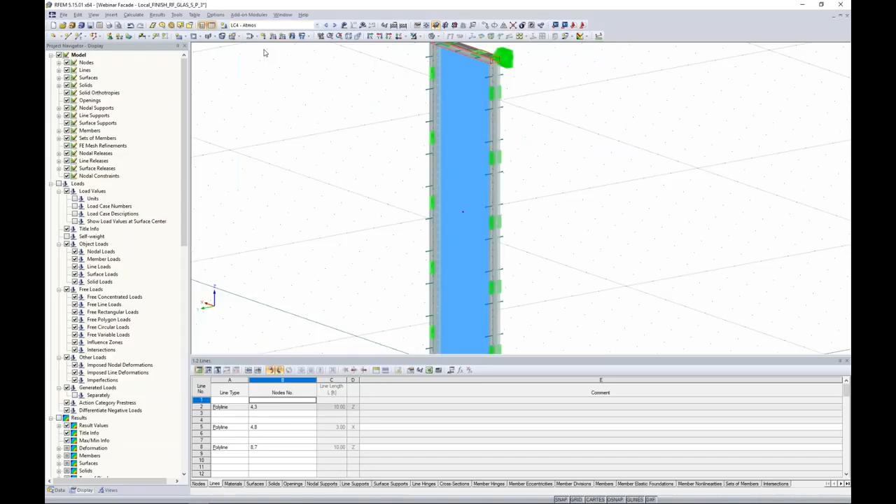And even further, you can take a look at the applied loads. We have the temperature loads, the atmospheric pressure shown here. Again, I've applied 50% to the external, 50% to the internal. You can vary this how you see fit, but this is what the program comes up with for those gas pressures applied to the surface, applied to the solid elements based on those calculations. Same thing with altitude as well. So kind of interesting to see what's going on behind the scenes with a local calculation.